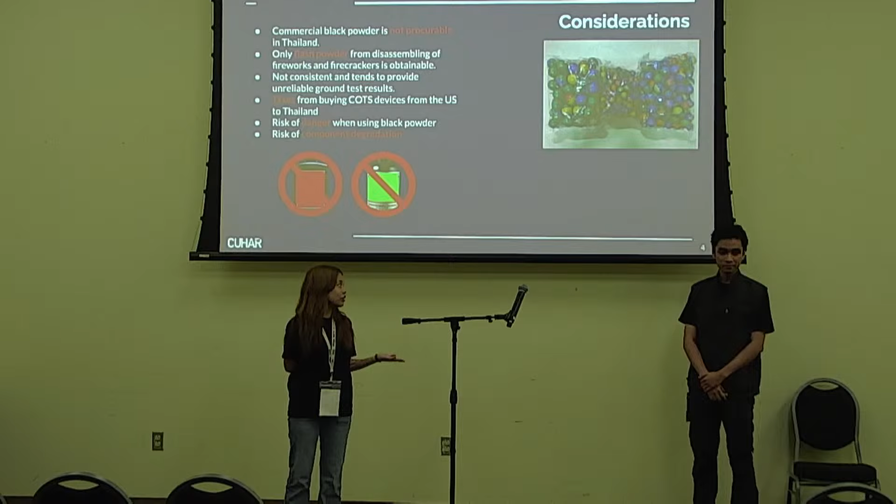So, okay, basically for recovery systems, the traditional way to do it is to use black powder. But in our case it's unique because we can't legally use black powder in our country. So the only workaround is to use flash powder from fireworks, which isn't very scalable and is quite dangerous. So we try to also move away from the risk of danger and the degradation of components. Another problem we might face is taxes from buying COTS devices from outer sources, for example from the US.

Okay, so this is our previous year's attempt. We had a pneumatic piston nose cone ejection system, and basically what we tried to attempt is to substantially reduce the use of black powder. But for this year, our goal is a little bit more ambitious. What we decided to do is to completely eliminate the use of black powder in our recovery system.

So just to add on, for our very first rocket for this competition, we used a pneumatic piston. This piston is kind of heavy, but it works by pushing the piston apart, like a mechanical separation. It was a start from our senior, but it was kind of heavy, so we tried to find another way which is more mass efficient.

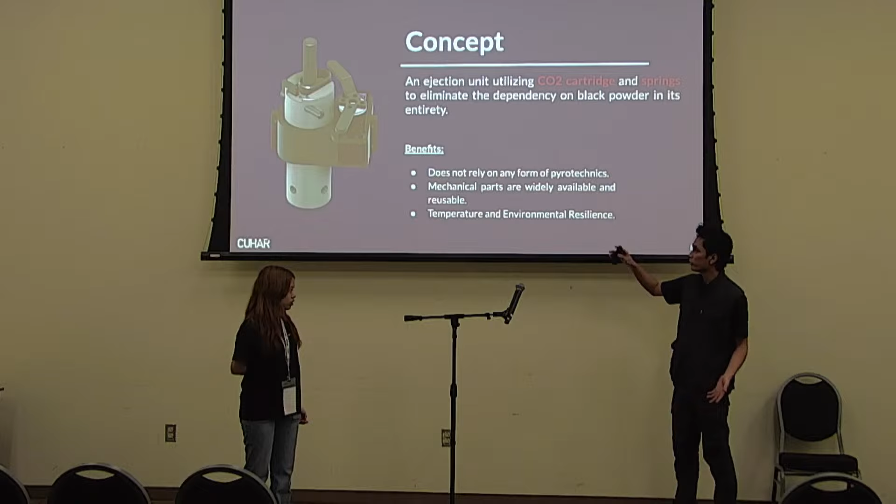And also in terms of temperature and environment, it was in-house manufactured, so it was not that sophisticated to manufacture in-house. We have a 3D printed case for the servo, which unlocks the key that is locking the compressed spring, which is essentially for puncturing the CO2 cartridge.

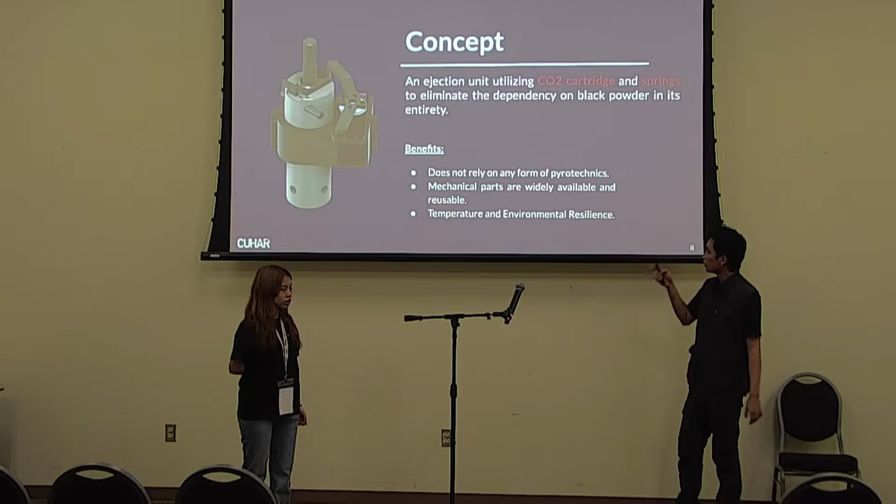Okay, so let's get into the spring integrated deployment. We're going to start with the components. So this is the center. We have a puncture pin, and with this puncture pin we have two main springs: a main spring and a rebound spring.

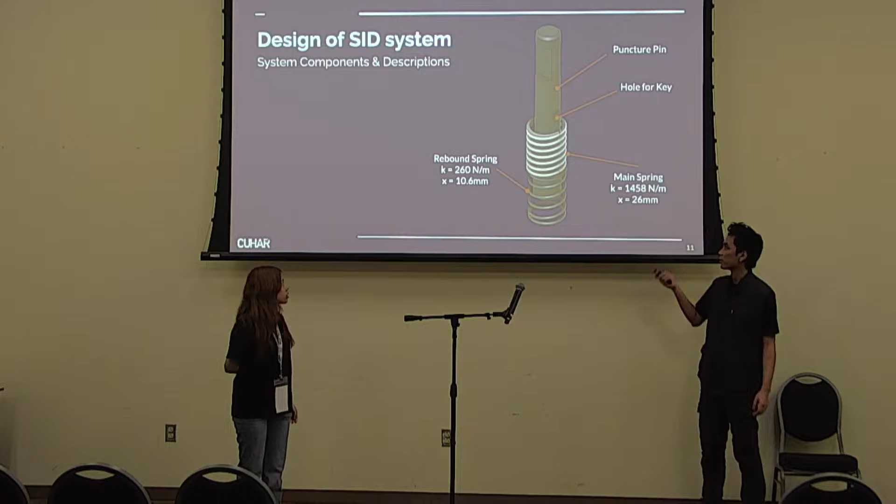The main spring is what drives the puncture pin to puncture the CO2 cartridge, and the rebound spring allows the puncture pin to rebound and clears the way for gas to escape. So we essentially do not want our pin to get stuck in the cartridge after puncturing, which is what the rebound spring is for. And this is just a sectional view of the component.

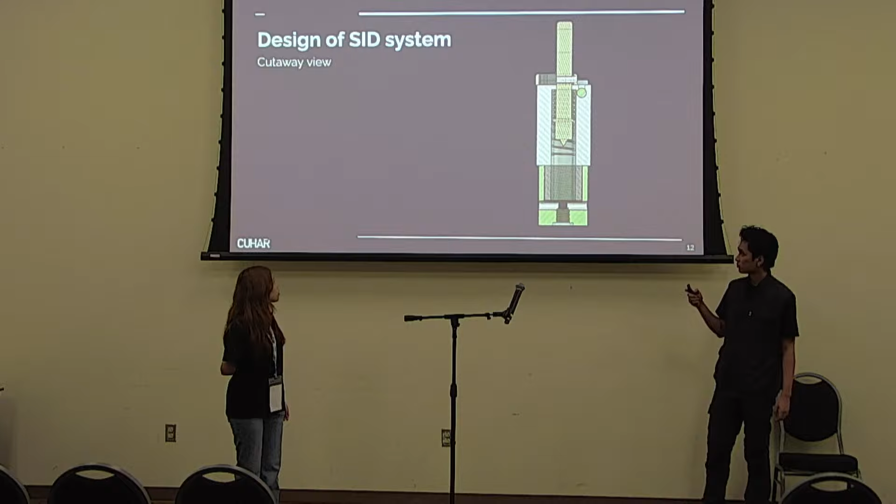Okay, so according to the DTEG, if you're using a spring component, we've got to have two safety locks. The safety key makes sure that the main key can't actually move or unlock itself for some reason, like vibration in the rocket. And the actual key slides out and the compressed spring decompresses, that's how it actuates. So this is the two key safety features that we thought of while designing this.

Okay, so these are the parts. All right, okay, yeah thanks. Okay, so is it working? Yeah, it does, okay.

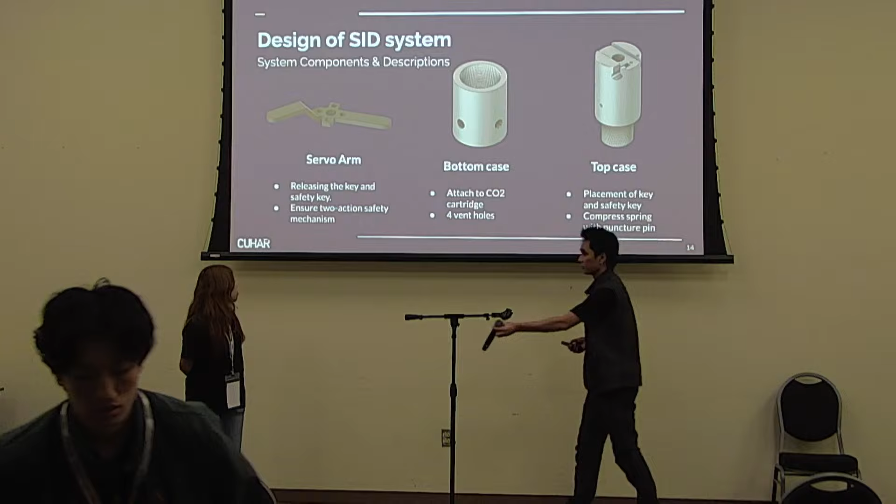So these are the parts of the spring integrated deployment component. We have a servo arm, which swings the safety pin out before actually actuating the component. There's a bottom case where the cartridge mounts to the component, and a top case where the servo, the pin, and the safety key are located.

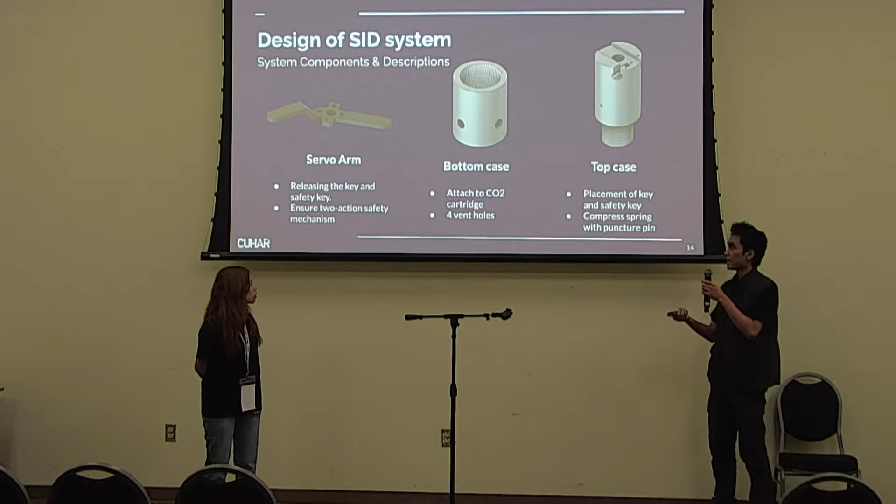And inside this top case, there will be a compressed spring. Okay, that's the servo motor we use, and that's the case.

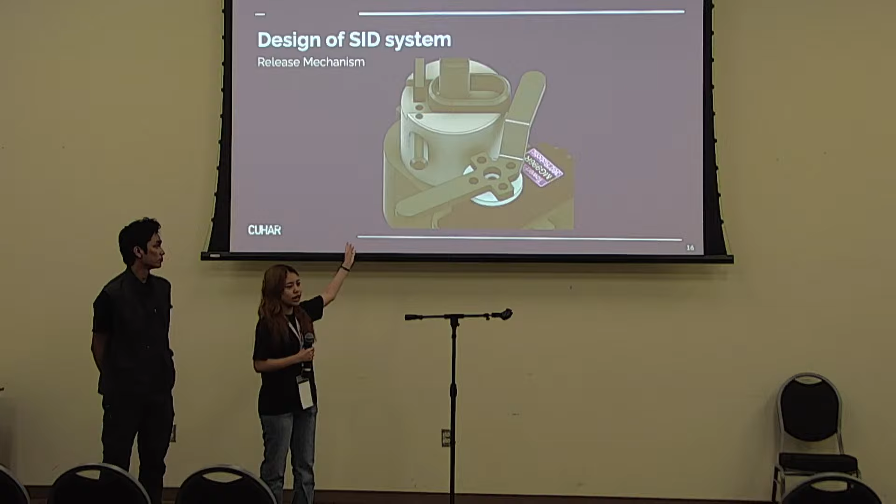Okay, this is the full assembly, and okay, we forgot to say what happens. Basically the servo arm first moves counterclockwise to release the secondary safety key. Then it will move clockwise to release the main key. And then the puncture pin will contract and puncture the CO2 cartridge.

Okay, so after designing and manufacturing it, we actually ran lots of ground tests, including inside our own rocket. So let's talk about the theory first.

There are two main theories that we use in calculating this component: moment and torque, because there's a servo that needs to sweep out the safety keys, and spring potential, which is calculating the spring needed to drive our puncture pin to strike and break the cartridge seal.

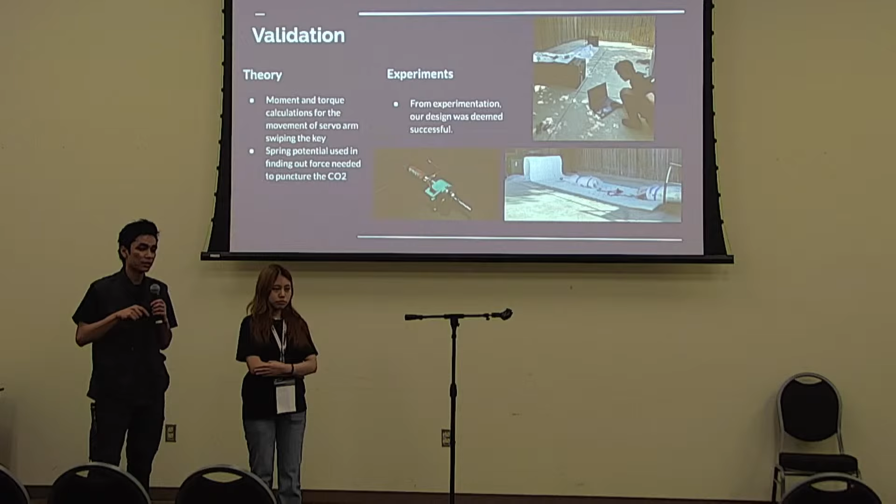And we experimented with it by itself first outside, then integrated it into our rocket to see if it actually works. And as you can see in the picture, our rocket separates.

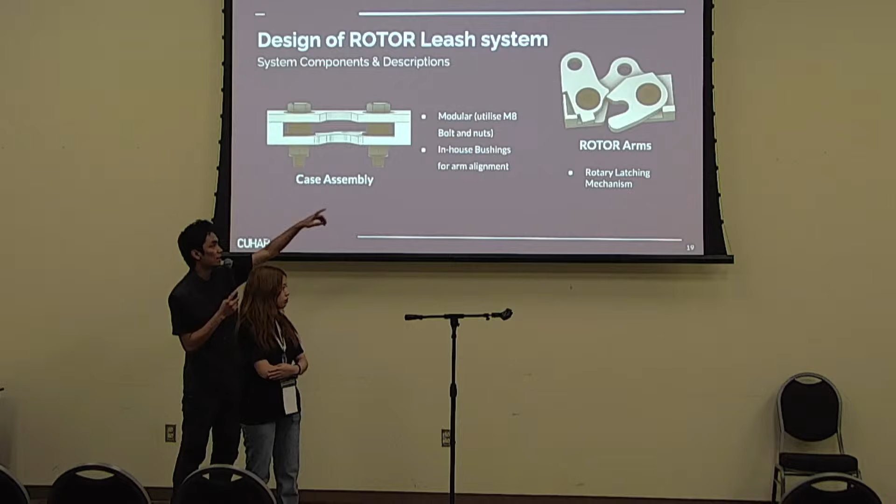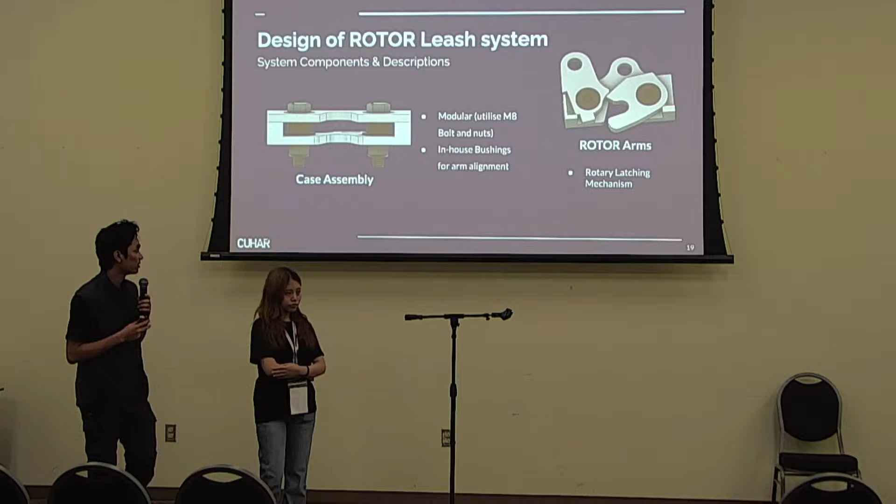Okay, right, so this is an overview of how it looks. This is the case without the arms, and as you can see in that picture, it shows how the arm is mounted. There'll be a case and bushing for the arm to pivot around, and this is actually modular because we can use fasteners that are widely available in local stores to assemble the case, and the bushing is made from nylon in house. So we make it ourselves, we don't have to spend lots of money ordering from outsourced manufacturers. Let's see the next slide.

Okay, so as I said, we have a case. There'll be a top case, bottom case, and a left arm, right arm, which are the main parts that unlock and lock our links, and there'll be bushings for aligning the arms together, and the whole case is compressed by fasteners which are available locally.

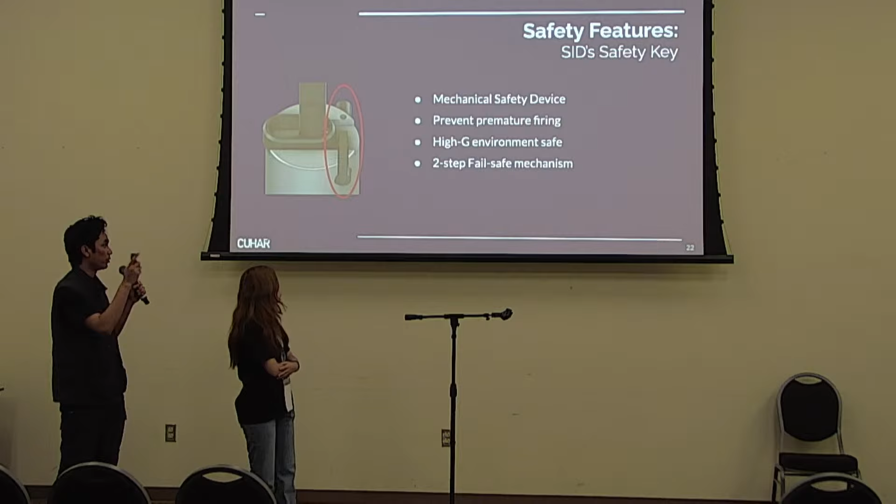Okay, so the safety features. We talked about the safety feature of the previous component, the ejection component. So we have a two-step fail-safe mechanism to prevent it from unlocking in a high G environment. And for the second safety feature of this component...

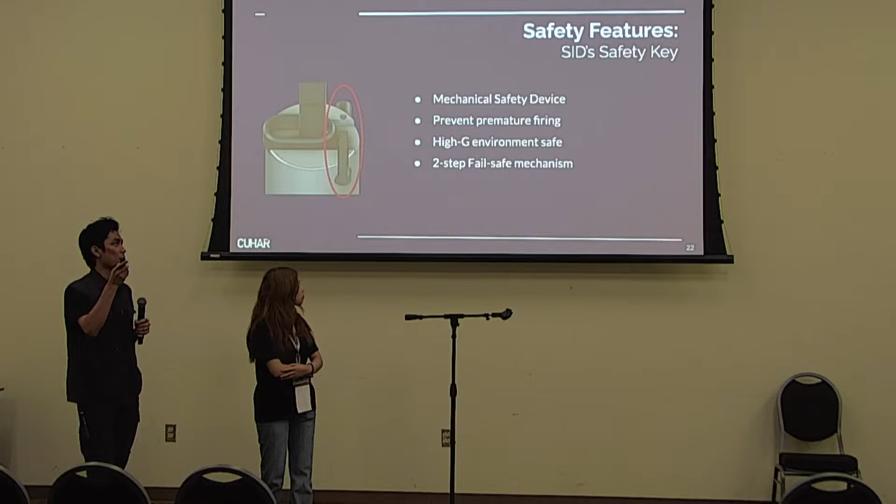Could you move? Okay, thank you. Okay, I'll tell you.

Okay, results and conclusion. We'll talk about the results and conclusion now. So the non-pyrotechnic recovery system is reliable from ground tests, from first calculating in theory and moving into ground tests, and we have validated our system several times, both in Thailand and after arriving here, we also validated it once again.

The system has the potential to be used in commercial rockets if we could commercialize it and find a way to produce the parts without complications. It would be great for Thailand rocket teams to use it since it does not complicate things, does not involve black powder, which makes teams have to find black powder, which is illegal and a gray area to use, and it does not degrade our component.

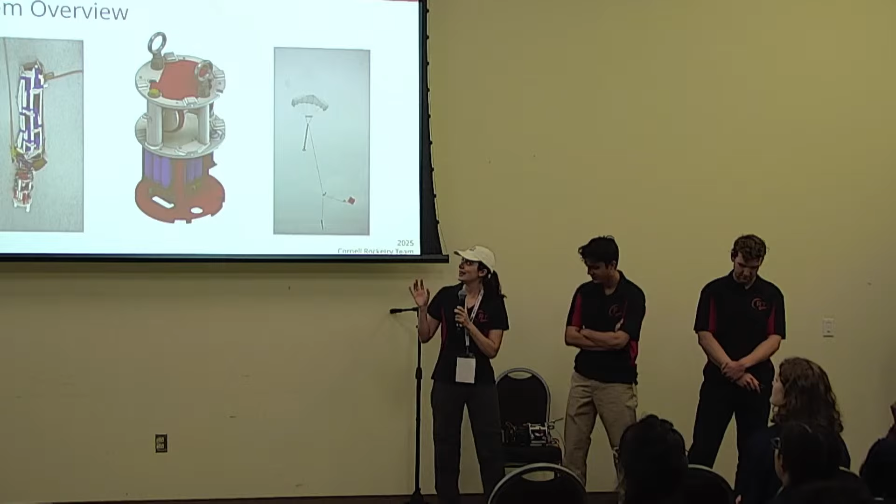So what we'll talk about today are three different systems. BLIMS is autonomous - it will steer our rocket's descent by pulling on the brake lines of a parachute to a specific GPS location that we input. The three parts we'll be talking about today are the mechanism, the controller, and the software that runs it.

To give you context about our recovery system this year, we're using a ram air parafoil. This is fundamentally different from the round canopies common in amateur rocketry. A round canopy is basically just a big piece of fabric inducing a ton of drag. A parafoil is different in that it's filled with cells that inflate with air and act as a wing. When you pull on the brake lines, they deform the ends of the parafoil, inducing asymmetric drag, which gives you a yawing moment.

That's what allows you to steer. So if you look at a photo of our test rocket underneath the parafoil, you can see it's actually gliding through the air - it's got some horizontal motion, and that's how we're able to steer, which gives you more control, but also gives you some more risk. It's definitely more complicated dynamics.

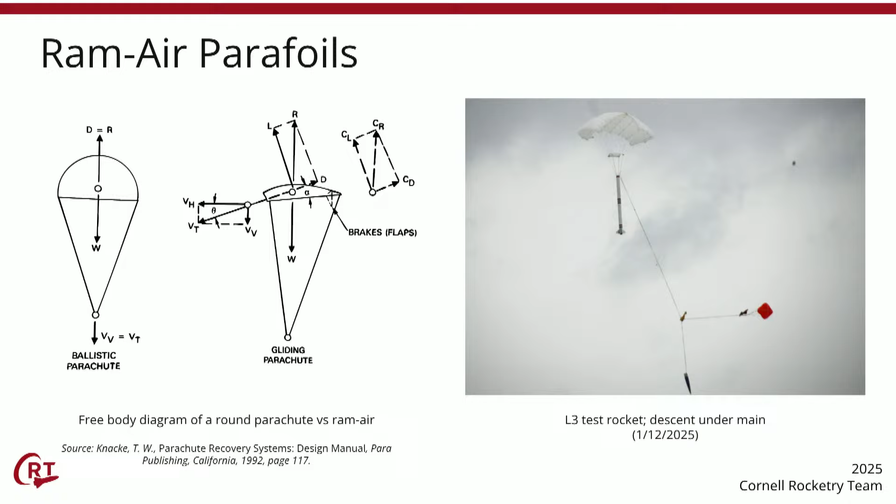Looking at our deployment sequence, it's also new for us this year. Usually we use 2 separations and deploy out of those, but this year we're just doing 1, using a COTS tether release device - the tender descender, which some of you might be familiar with. That definitely complicates our deployment and is just another thing we have to think about when starting the recovery sequence.

BLIMS is comprised of 2 bulkheads, and in between those bulkheads are a pair of spools. Those spools are mounted on a single shaft and powered by a single motor. By winding the brake lines of the parachute on each spool in opposite directions, as we spin the shaft in a single direction, we get counteracting up and down force, retraction and extension, which then leads to the left and right banks of the parachute.

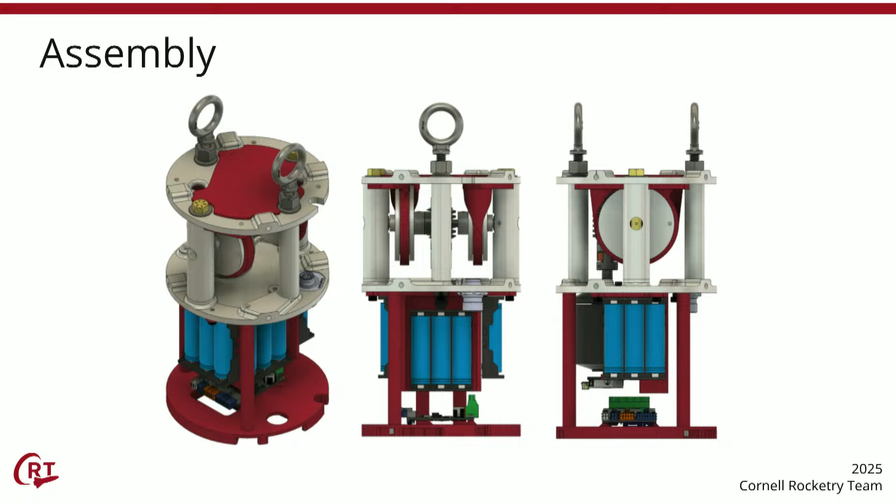Underneath the second bulkhead, we have the motor as well as all the batteries and the motor controller, and you can see a port down at the bottom there which allows us to connect this whole system to our central flight controller, which is running our own flight software - Trevor's program - and sends the signals.

You can see in this cross-section just a bit more detail of those 2 spools. We're using a worm gear and worm to transmit the motor torque up to the shaft. This prevents backdriving, so as the parachute initially deploys and there's a pretty significant force, this prevents that force from being transmitted back into the motor and causing us to lose position.

To select an appropriate motor, we wrote our own software simulation that takes into account actual motor torque curves, gear reduction of the worm and worm gear, the spool radius, and a few other factors. It generates a 3D grid of points, each point's color representing the validity of that combination. By visualizing these 3D spaces, we were able to identify not just the most appropriate motor given the torque and speed requirements, but also where in that operating envelope we want to have it.

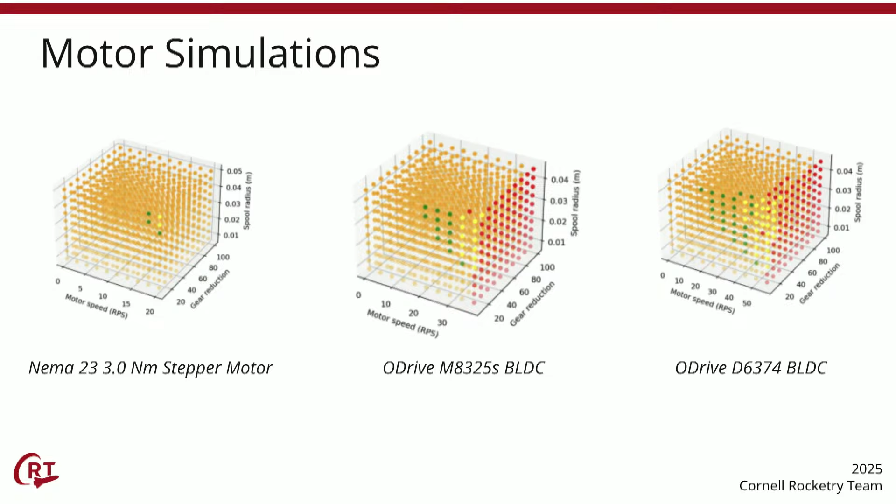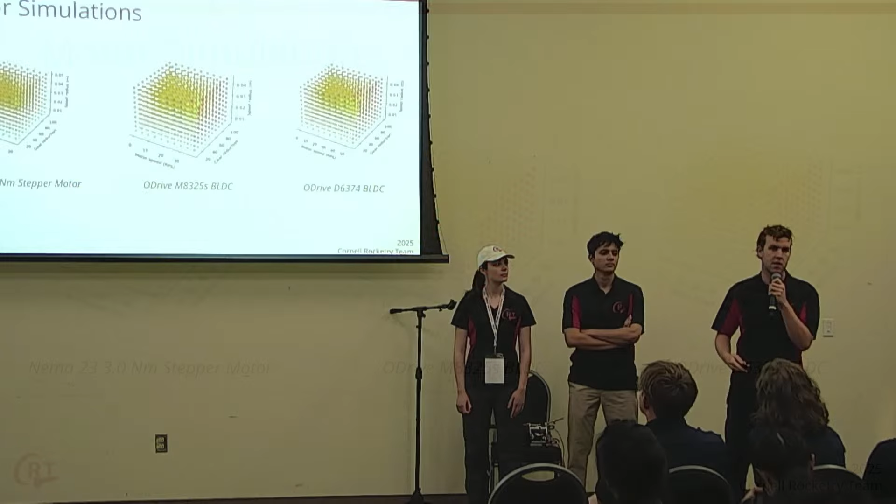We'll talk later in this presentation about the iterations we've gone through, but having an underpowered motor has been a huge issue for us. So actually writing this simulation and taking the time to think about it was pretty essential to having a high functioning mechanism.

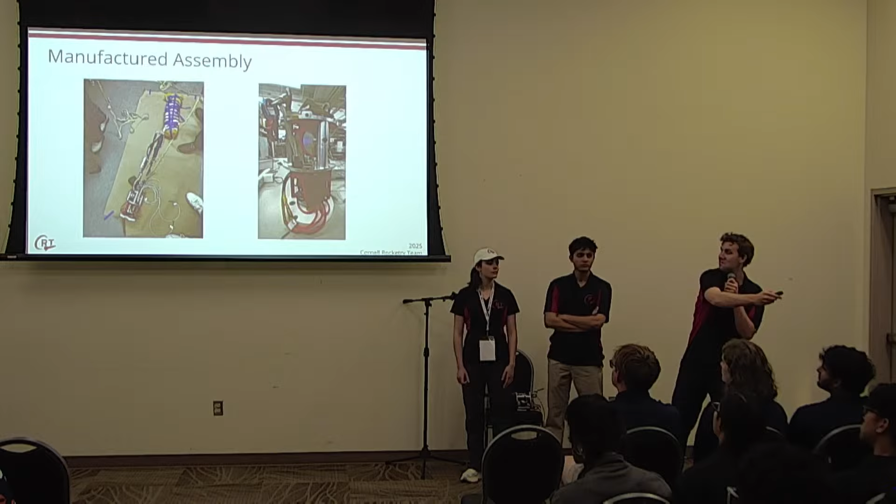Now I'm going to talk about the software architecture.

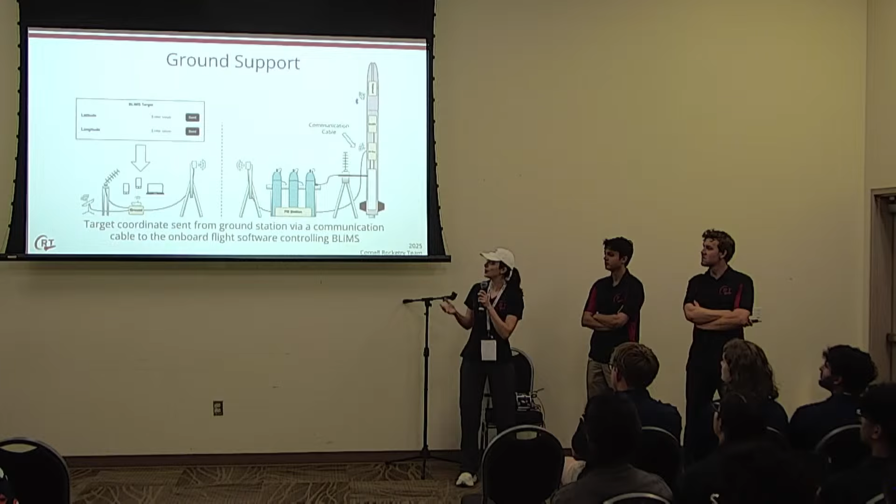This is an overview of our software system. We have a ground station that sends our intended latitude and longitude, which we input on a website. That is sent over a wireless bridge to our fill station, which then connects through a cable with our onboard flight computer - this is all an SRAD system. This allows us, on the pad right before launch, to send our intended latitude and longitude that we want to direct our rocket to.

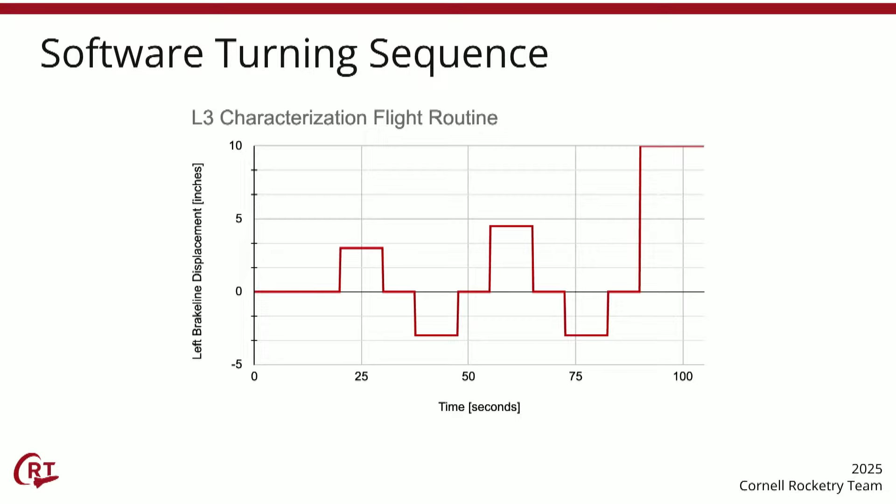Okay, so Thomas has now described a mechanism that is capable of performing the maneuvers that we want to execute underneath the parafoil. Gabby talked about how we can then talk to the rocket when it's on the pad and actually use the central flight computer to precisely control the motor when we're in flight. So now the question becomes, how do we actually steer to where we want to go?

So to answer that, I want to start with just some definitions. If we know our own GPS location and we set a predefined target, which we send when the rocket's on the pad, we can call our bearing the vector from us to the target - that's basically the way that we want to be traveling. Then the heading is the direction in which we are facing, and the track is the direction in which we're actually traveling - it's effectively your velocity vector. I'm making that distinction because they might not necessarily be the same thing.

For example, if you're in a heavy crosswind, then you might have a situation where you're facing one way but actually moving in a slightly different direction. So the control variable that we really care about is the track.

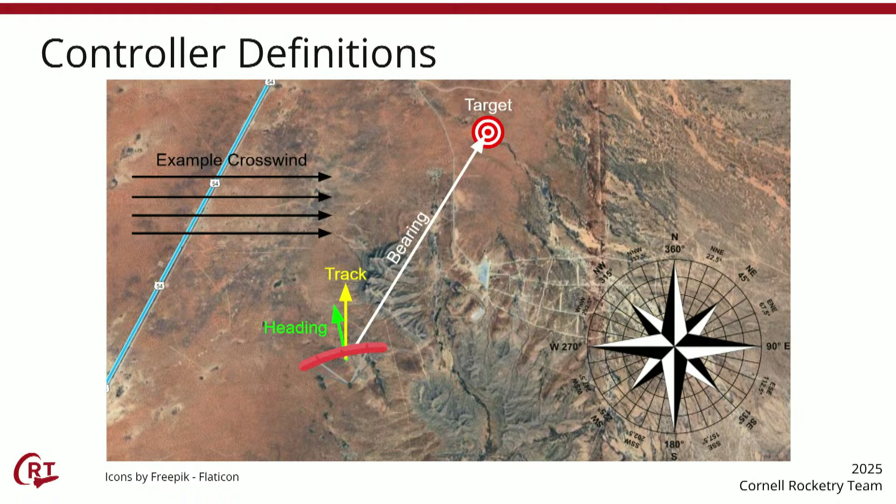So that discrepancy is fed into a PI controller, where your proportional control is kind of your immediate response to that - anytime you're not directly traveling in the direction of your target, you're going to have some P term show up there. And the integral term basically acts as your trim in the flight. So if you are being pushed by a crosswind that is holding you slightly off the vector you want to be on, that integral term will accumulate over time and will basically allow the system to correct for that error over time.

So I mentioned earlier that we've gone through a few evolutions of BLiMS. Here's a layout of all of our different generations going all the way back to 2019. What I want to emphasize here is that this system is kind of deceptively challenging. We actually started with a 2-motor design and ended up simplifying it to a single motor design.

So for a team that is considering building one of these, specifically on this 2-motor versus single motor point: we deemed, after actually jumping out of planes ourselves and talking with skydivers, that the added maneuverability of a second motor really isn't worth the additional technical complexity. We spent several years trying to develop this 2-motor design - packaging was really challenging. We ended up simplifying to a single motor design, and it's now working quite well. So this is just a point for anyone considering it: think about whether you really need the added flexibility of a second motor and whether it's worth that development cost.

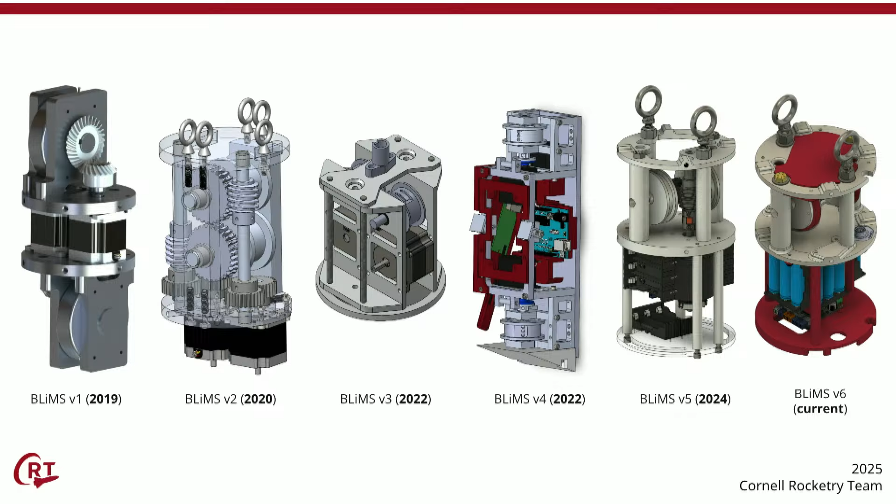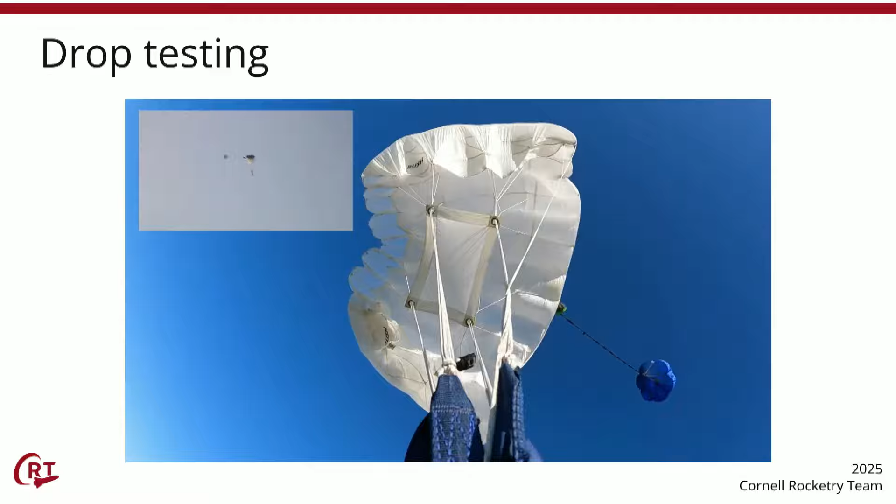So this is a video of us drop testing. Up until last spring, we had not tested our ram air parachute, and there were a lot of unknown factors, like could we deploy it correctly, could we package it correctly. We got to work with a local skydiving company that willingly dropped a 100-pound metal tube out of a plane with a parachute that may or may not deploy.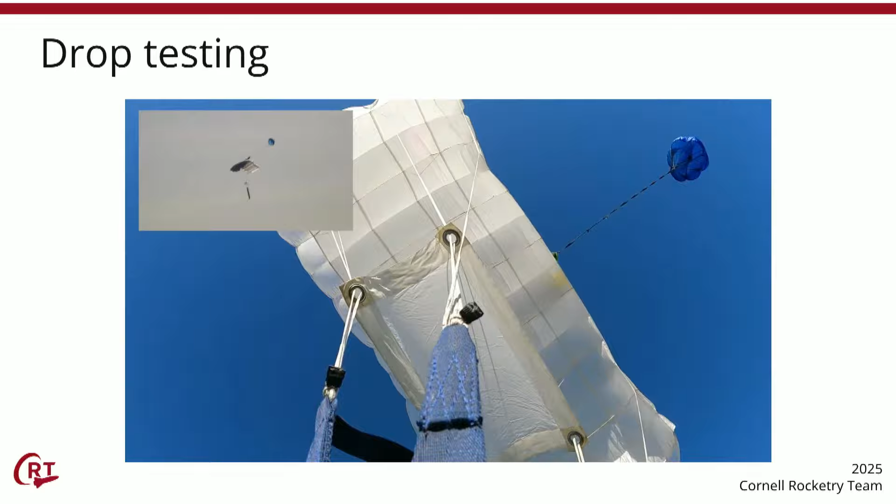As you can see, we successfully deployed, didn't hit any cows, and this taught us a lot. It showed that this parachute could be successful and that we could use it for our system. But what we also realized from this test is that we couldn't fully simulate a flight scenario, which prompted us to create our own testbed rocket this year, which we'll talk about later.

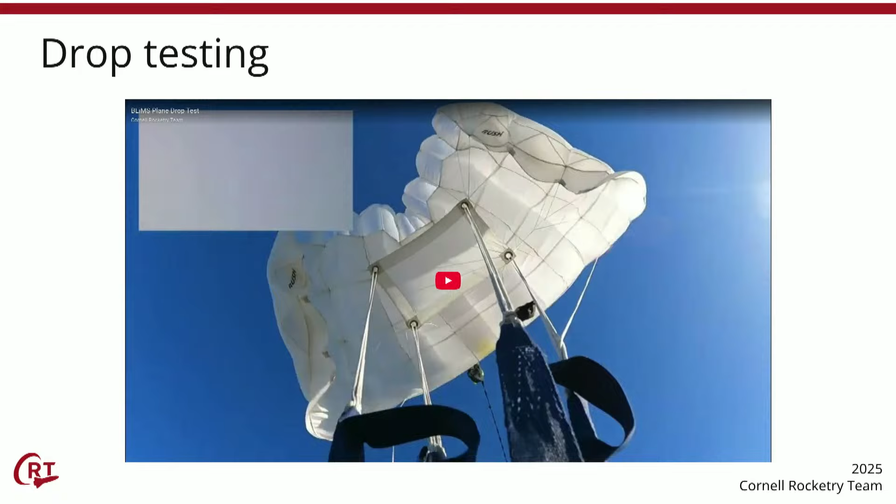One thing I want to highlight is those large opening forces. We have a nearly 150-pound rocket, and when that ram air parachute deploys, there's significant loading. In addition to the ANSYS static structural tests, we also built our own test rig. On the left there is a 2,500-pound winch, which we can use to apply forces for an extended period onto specific components of the BLIMS assembly as well as the entire assembly itself. This really was about making sure the components could withstand the forces, but also that the shaft wouldn't deform under those loads and cause binding later on in operation.

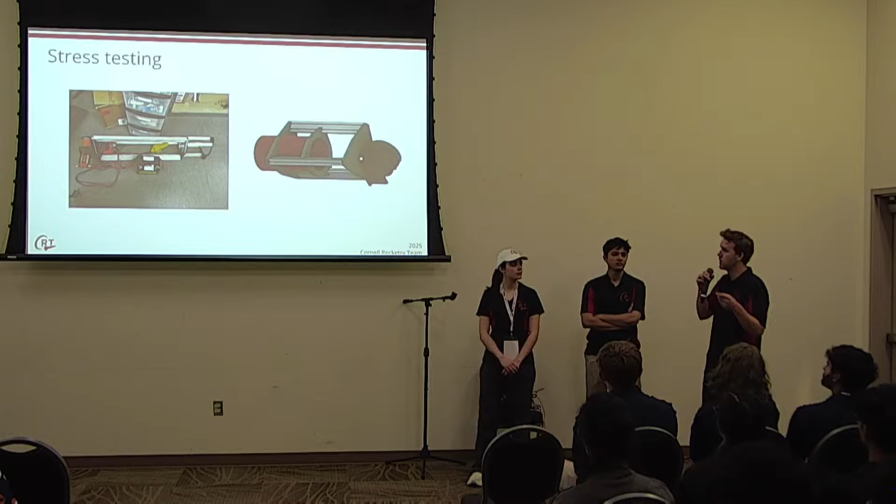This was hugely valuable because ANSYS and FEA in general can give you really precise results, but validation is equally as important. This was an important step in making sure that our simulation results actually matched with reality.

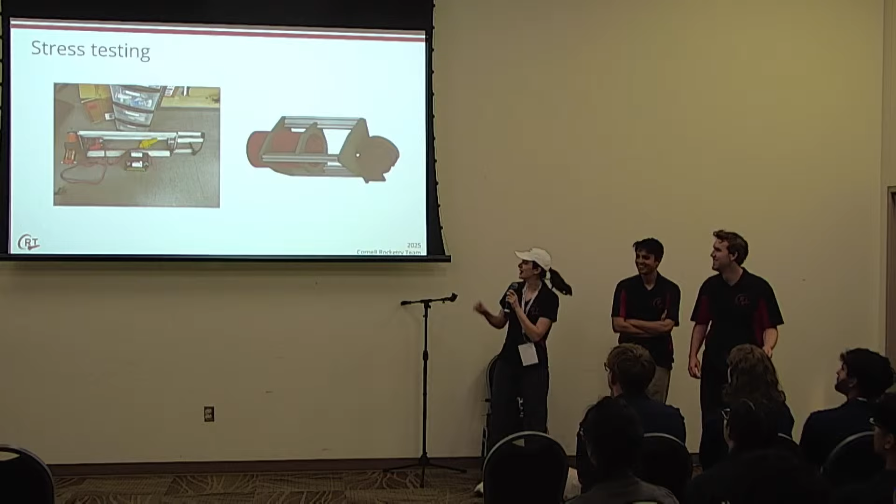Like Gabby mentioned earlier, we decided pretty early on that it was going to be really important to our design process to have a way to actually get this thing in flight. The way we did that was through a rocket independent of our competition rocket. So we brought up an L3 test platform and launched it 4 times.

You can see we definitely had a bunch of failures. That's the first time we tried to launch it - it blew up on the pad. On the right there, you can see the rocket sitting in the snow. That is indeed the main parachute still inside the section. So we had a lot of problems with things surrounding the system, not just the system itself.

I talked about how we had that new deployment sequence for us - we definitely had some hiccups there that we had to deal with. This was just a really great way to get through that. But we also got a ton of great data out of this.

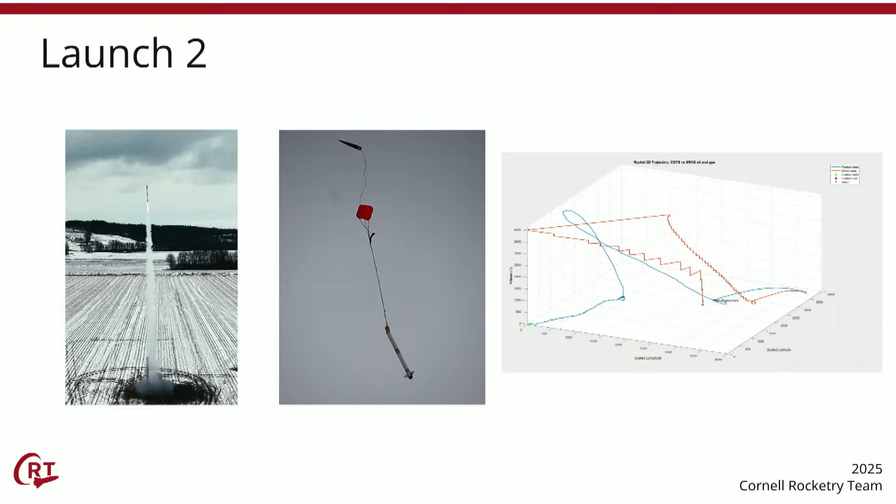Our second launch was the first one where we had some real success. This was the first time where we had our SRAD GPS driver working, so that allows us to get real-time GPS data that can actually be fed into the central flight computer. This was also the first time we had our parafoil deploy with this rocket.

The next launch where we had a lot of success was the fourth one. Here's the GPS trajectory from the launch. At 1,500 feet, our main parachute opens, and all of those little zigzags is BLIMS turning the rocket.

That characterization sequence that Gabby was talking about earlier, that's what we're doing here - we're trying to see how consistent we are when we pull this amount, how much the rocket actually turns. This gave us a bunch of really good information about that, and it's just super cool to see that we could actually turn - that was really great.

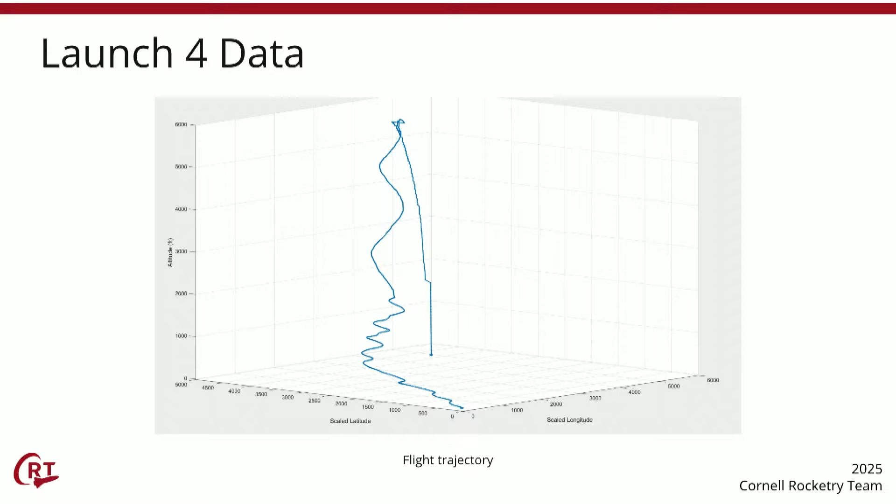So here's the top-down view of that trajectory. You can see after each maneuver is called out there, we have a clear turn.

Something really important to note is how susceptible we are to wind. All those little points mark every time our track vector is more than 90 degrees away from the wind direction. At that point, we effectively stall and have no more forward motion. That's a huge limitation on our system. If the wind is strong enough, we just can't travel upwind.

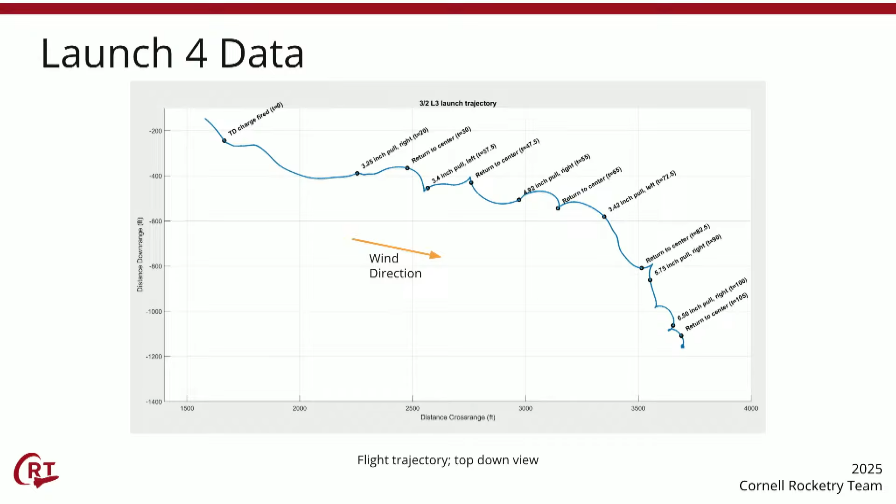So the way around that for now, from a mission planning perspective, is trying to choose points that are downwind. Luckily we can change our target right before we launch, so we can get an idea of what the wind looks like and choose a point downwind. Additionally, the controller is tuned pretty conservatively. It is a skydiving parachute, so you can do sporty, aggressive maneuvers, but the goal here is to have more conservative, slow movements to get us facing the way we want.

Another tool we use to understand the parafoil—the dynamics are really complicated—so we made a simplified simulation in MATLAB. This just considers a 2D plane and some torques: the torque applied by asymmetrical drag from pulling on the brake lines, a small drag torque resisting our motion, and a wind restorative torque term representing the fact that the parafoil wants to orient towards the downwind vector. This was useful to understand what a step response would look like.

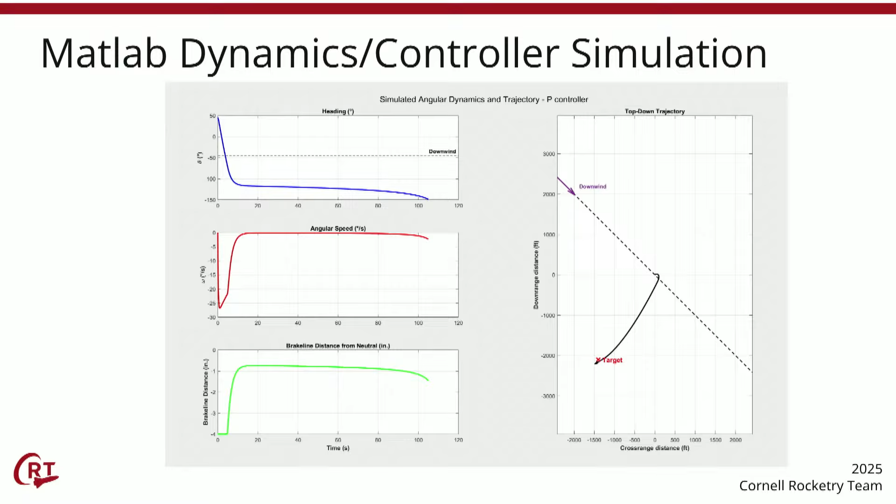Here's an output of where we're running a P controller. You can see the undershoot characteristic of a P controller, which causes increased input over time as you get closer to the target. This was built based on our empirical data to match that as closely as possible, and it gave us a starting point when tuning our gains, while also letting us understand how an undershoot would affect us and what we need to consider when choosing a target.

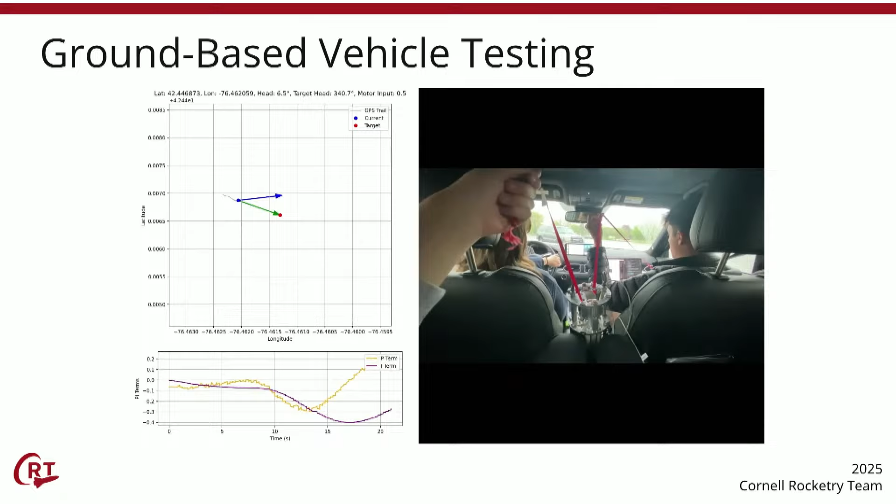The last step of testing the controller was we put it in a car and drove it around to see what it did. On the left is a visualization of the data coming out of the controller in real time—the blue arrow is our current heading. As we steer over the target bearing, the system responds: right now we're too far to the right, so the left brake line pulls in, inducing a left turn back towards the center. Watching the P and I terms, the P term responds immediately to the error, while the I term slowly integrates that error over time. This was a good way to validate on the ground the ability of our controller and the logic in general.

At this point, we have a mechanism that's been tested in flight and we know is robust to those high opening forces and able to execute calibration turns. We have a controller able to steer us in that direction, which has been tested on the ground. Tomorrow, we're excited to launch this system with both of those married together and actually guide to a GPS waypoint for the first time—and hopefully not end up in a tree.

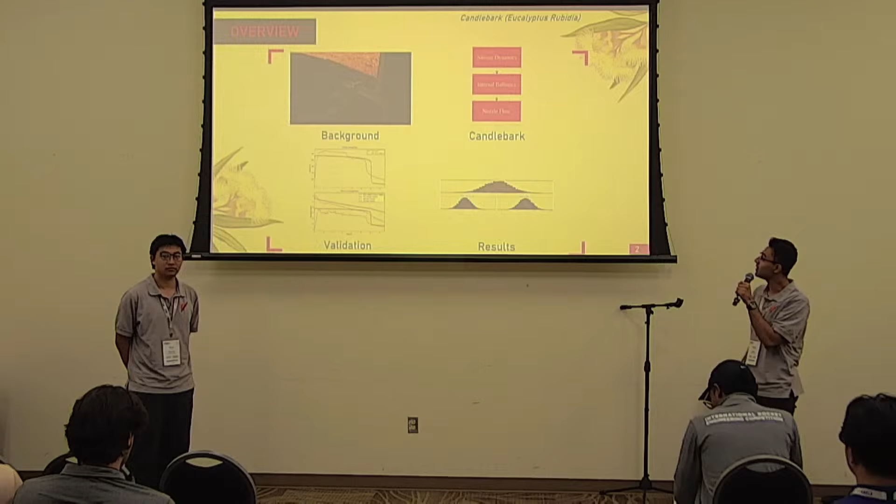Today we'll take you through a background into hybrid engines and the team's history with hybrid propulsion. We'll then take you through the internal models that make up Candlebark, and through the rigorous testing and validation we've conducted via internal tests, unit tests, external validation, and finally a flight test to validate the performance of our software. Finally, we'll show how we applied our software to our IREC 2025 entry into the 10,000-foot SRAD hybrid liquid category, Project Podium.

A little bit about hybrids: unlike solid engines, which fuse their oxidizer and propellant into one singular grain, hybrids have these separated. Typically this looks like a liquid or gaseous oxidizer and a solid fuel. This results in a much more distinct thrust curve compared to solid engines with similar impulse, where the majority of thrust is produced during the liquid phase, and a sudden drop-off is seen during the gaseous phase. This presents a new set of challenges when designing a launch vehicle around a hybrid engine.

A quick bit about the team's history with hybrid engines: our journey began in 2021 with Project Waratah, our first subscale hybrid engine, which laid the foundation for our understanding of hybrid propulsion theory and engine design. This carried on to Project Wattle, an N-class hybrid motor, which also saw the development of our permanent testing facility, allowing us to conduct hot fires of all three hybrid engines. Knowledge from these two research projects then led to the design and testing of the Podium engine, our first flight-scale hybrid engine, which, unlike our previous engines, had much more finely tuned performance parameters that were increasingly modular due to the engine's concurrent development alongside the launch vehicle.

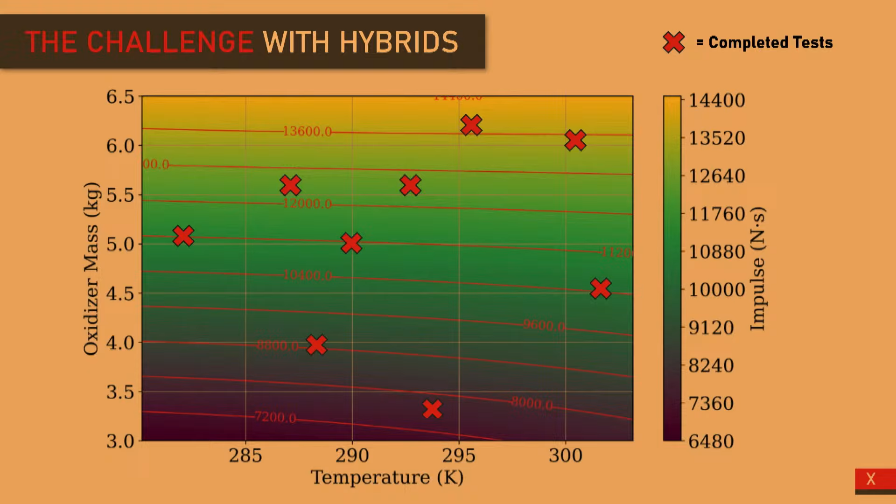The primary challenge we face, and hybrids in general face, especially when transitioning from a research project to one considered for a launch vehicle, is the high variation of hybrid engine performance based on ambient temperature and overall environment, where small changes in temperature result in fairly large deviations in the oxidizer mass that can be loaded during filling of the engine, which significantly impacts impulse and therefore the apogee of the launch vehicle. The USYD Rocketry Team has conducted a series of fill tests throughout our testing campaign and seen small deviations in temperature result in fairly large deviations in mass.

Current solutions or simulators available to solve this problem and better model hybrid engines range from student research and designed softwares to commercial softwares. While commercial softwares may offer increased advanced performance and model complexity, the paywall often associated with these effectively makes them unviable for a student team such as ours. Current student research and design softwares such as HRAP, OpenThrustPy, Novice, and HybridPy employ fairly simplistic models for their nitrous modeling and internal ballistics, which could be improved upon.

However, the team sought to utilize a hybrid simulation software and package it further down the line with trajectory solvers, allowing us to create an end-to-end software pipeline to accurately and effectively simulate a hybrid launch vehicle from the conception of its engine all the way to its launch. We found that no commercial or SRAD options met our requirements, and hence we moved to creating our own simulation software.

Candlebark, named after a native Australian flora, hence the lovely flowers you guys can see, is based off 4 major pillars.

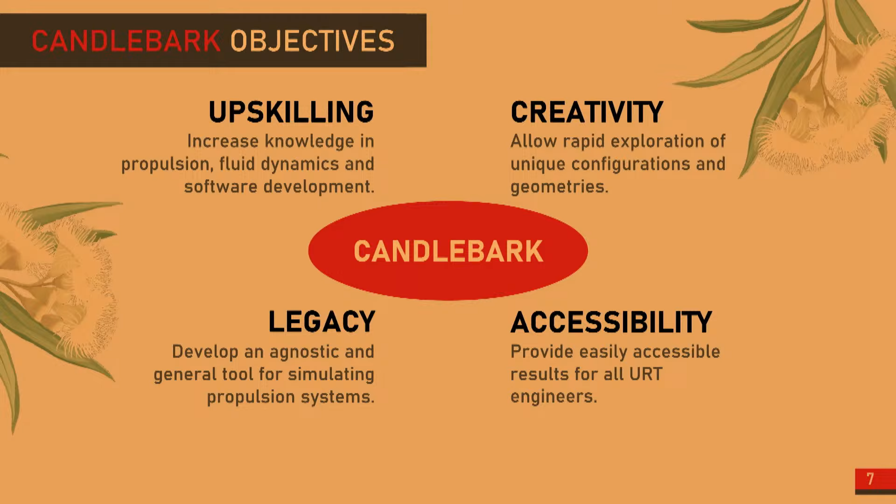Firstly, upskilling, ensuring that our software is able to condense and capture as well as teach our undergrad engineers to do with combustion and fluid dynamics. The second is creativity, a core tenet towards Candlebark and our hybrid simulation software was to ensure that the complexity of our hybrid engine designs was limited by the capability of our engineering capabilities rather than the quality of our software.

Next, accessibility. As a student team, we wanted to ensure that undergrads of any level could understand, utilize, and further progress this software, and hence it was written in Python, which is taught as a first-year course at the University of Sydney.

And finally, legacy. We wanted to create Candlebark not purely as a software that could be used for the current project where it was modeled, but more so a tool that was decoupled from the current project and could be continually advanced and progressed for more complicated and sophisticated hybrid designs as the team continued its journey with hybrids. And now I'll pass it on to Coy to take a deep dive into the methodology behind Candlebark and the internal models that allow it to have greater performance compared to current SRAD options.

So everybody, my name is Coy. Candlebark is divided into 3 core control volumes that encapsulate all aspects of hybrid rocket engines.

We have the first control volume, which is nitrous dynamics, responsible for simulation and modeling of how the tank drains and how nitrous evacuates the tank, and how that affects the temperature, pressure, and molar composition of the tank.

Secondly, we have the internal ballistics module, which is responsible for the regression rate calculations, gas dynamics, and how our geometry evolves as a function of time. Finally, we have our nozzle flow module that is responsible for calculating the thrust force given the exhaust gas dynamics.

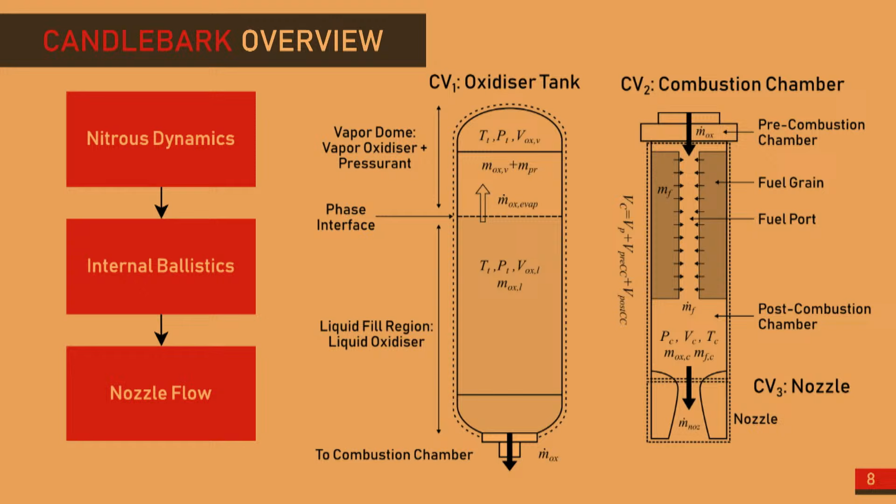I'll be focusing on the novelties of Candlebark, which is focused on nitrous dynamics and internal ballistics. The nitrous dynamics can be broken into 2 core main logics, which is the tank drain and the injector model.

For Candlebark, we employ a non-ideal, non-adiabatic model, meaning we account for the heat transfer processes within the tank. There are a couple different heat transfers occurring: firstly, temperature differences in the phase of the tank, the liquid and vapor interacting with each other, as well as liquid to the tank wall and the tank wall to the ambient, as well as the liquid evacuating the tank.

Secondly, for non-ideal effects, we employ a non-ideal equation of state, meaning we are able to account for molecular interactions within our gaseous phase, which has given the team much better simulation modeling capabilities of pressurants in the system, giving us the flexibility to design systems that can go into that sort of regime of pressures.

Next, for injector modeling, simulation and modeling of injector flow is perhaps the most crucial component in quantifying hybrid rocket engine performance. This is extremely difficult due to the high pressure drop experienced by hybrid rocket engines, hence you often have phenomena such as two-phase flow and choked flow.

Now, there is no encapsulating model that captures good nitrous flow across all flow regimes, and hence Candlebark is dependent on casework. For example, if all liquid has evacuated the run tank, the single-phase incompressible model is defaulted to, because the fluid is inherently singular phase, and the pressure convergence is satisfied enough such that single-phase incompressible becomes valid.

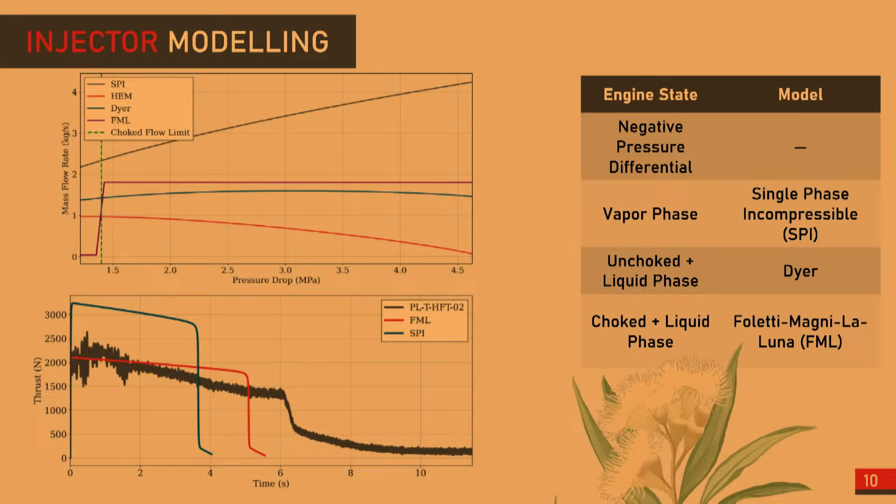So then Candlebark, for every single time step in a simulation domain, depending on the pressure drops, fluid dynamics, and characteristics, is able to dynamically choose which model it solves for nitrous flow.

So now finally, we have the last cool feature of Candlebark, which is its ability to extend past circular port simulation and modeling. Candlebark has a couple of port geometries built in, however, the user can import a CSV document containing the geometry they want as X and Y values. This has allowed unprecedented creative freedom in terms of hybrid rocket engines, and it has allowed the UC Rocketry team to explore many unique and different port geometries in their design cycle.

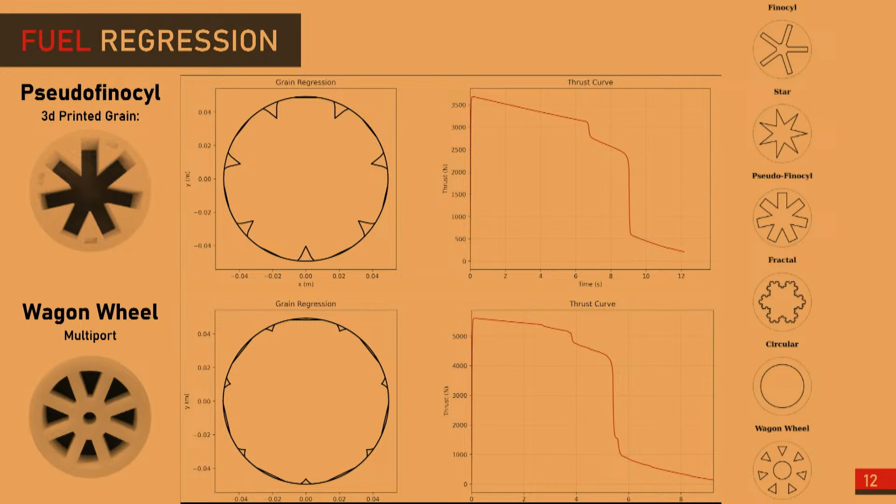So now I'll give the mic back to Sahaj, and he will discuss how we validated all of our software.

Now that we've gone through the overall methodology behind Candlebark, we also engaged in a rigorous testing campaign to ensure that our novelties allowed Candlebark to have boosted performance compared to other viable public options. Firstly, we engaged in unit validation, for example with our nitrous modeling, which fused our tank draining and composite injector modeling through multiple cold flow tests, and we found good agreement between experimental and theoretical data. We also utilized cold flow tests to derive our injector discharge coefficients to further boost the accuracy of our model.

We then engaged in a rigorous testing campaign throughout 2024, especially with our Podium engine, where we tested a vast array of very different engine configurations, varying our injector area, our fuel grains, as well as our nozzle throat diameters. Despite these very large deviations in our engine configuration, we consistently saw with our latest model of Candlebark very good agreement with experimental data.

Comparing this with University of Tennessee's commonly used hybrid simulation software, HRAP, we saw consistently much better agreement with Candlebark as compared to HRAP with our experimental data. It should also be noted that specifically for hot fires 10 and 12, more complicated engine configurations were hot fired, namely reduced infill density of an ABS fuel grain, and secondly with hot fire 12, a much more pseudofinocyl fuel grain, which HRAP could not support.

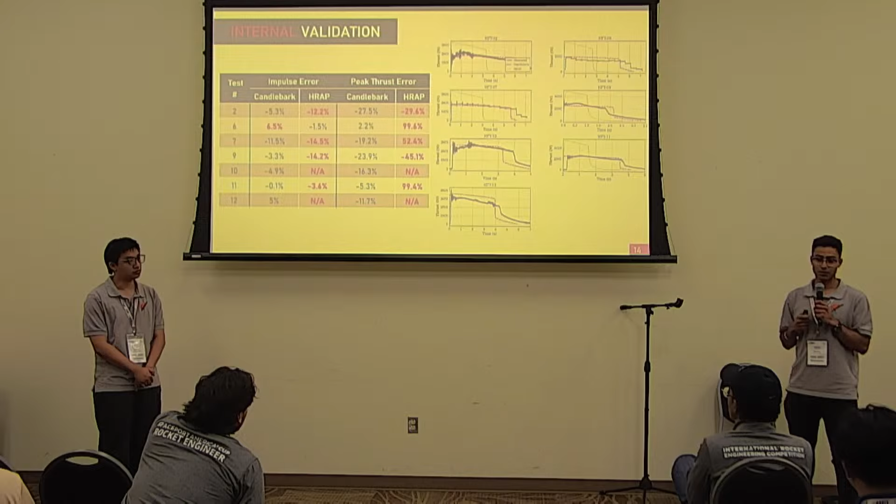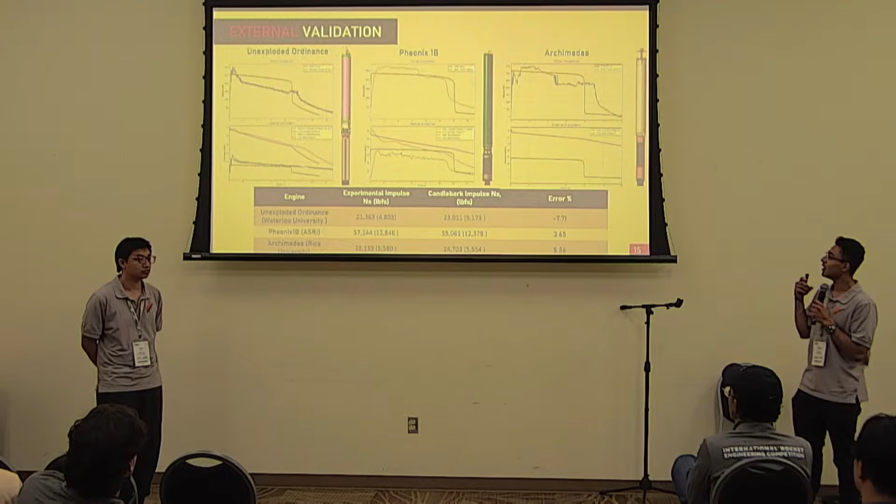To ensure once more that we created a tool decoupled from the engines it was modeling and developed and validated against, we also engaged in a rigorous external validation campaign, using publicly available data from hybrid rocket engines made by student teams and research groups. We ended up seeing a very similar amount of error and agreement with our overall impulse. This included the unexploded ordnance by Waterloo, Phoenix 1B by ASRI, and Archimedes by Rice University.

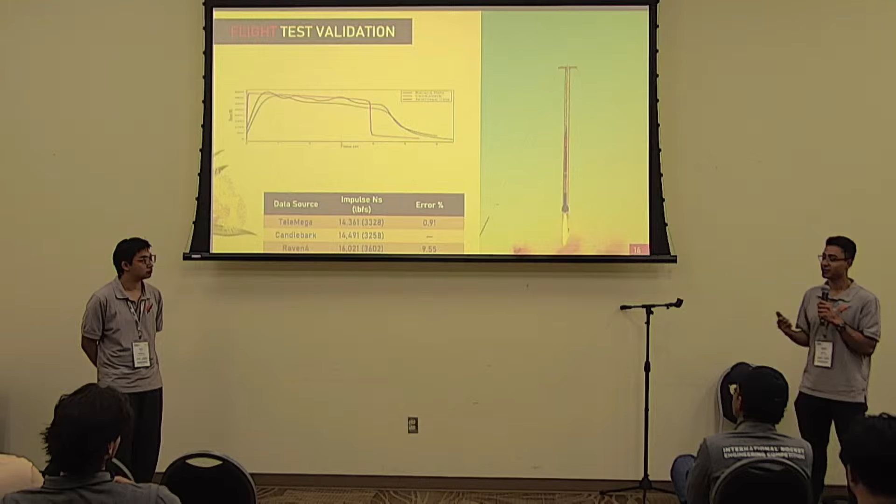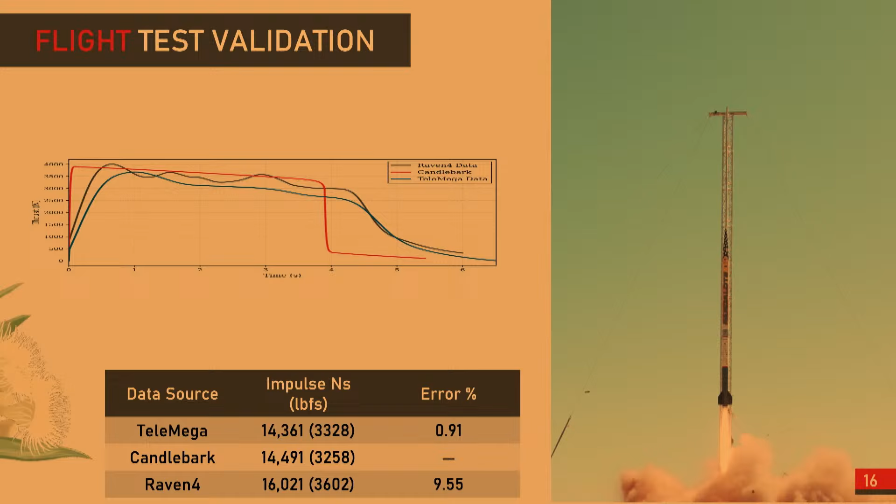Finally, to translate this into a launch vehicle, we also compared Candlebark's prediction of Podium's launch with the experimental data of a thrust curve derived from accelerometer data from our flight computers. We found with our Telemega, our primary flight computer, a less than 1% error in the thrust curve and overall impulse, and with Raven, we saw about a 10% error.

I'll now pass it back to Koi to discuss how this tested tool was utilized to solve the main design engineering problem of Podium.

Since Candlebark and Podium were developed concurrently with each other, during the early stages of the design process, Candlebark was not available as a tool to be used. So the team reverted back to using HRAP to size all their propulsion systems. One of the main criteria for sizing is to have an adequate pressure drop in order to have good combustion stability, which is something the team has experienced issues with in the past.

Since HRAP uses the single-phase incompressible model, as previously mentioned, for large pressure drop regimes it tends to overpredict mass flow rate, and since we sized everything based off of that, it drastically undersized major components of our propulsion system. Hence Podium, for the majority of 2024, did not reach its target apogee and other target performances. So then Candlebark was implemented to resize the propulsion system, given the constraints that the casing of the engine and the tank had already been manufactured previously.

So the sizing scheme of Podium is automated, given that the user inputs the constraints of the problem. In our case, we have constraints on the maximum length of the fuel grain, the diameter of the fuel grain, the maximum injection area, and its maximum chamber pressure.

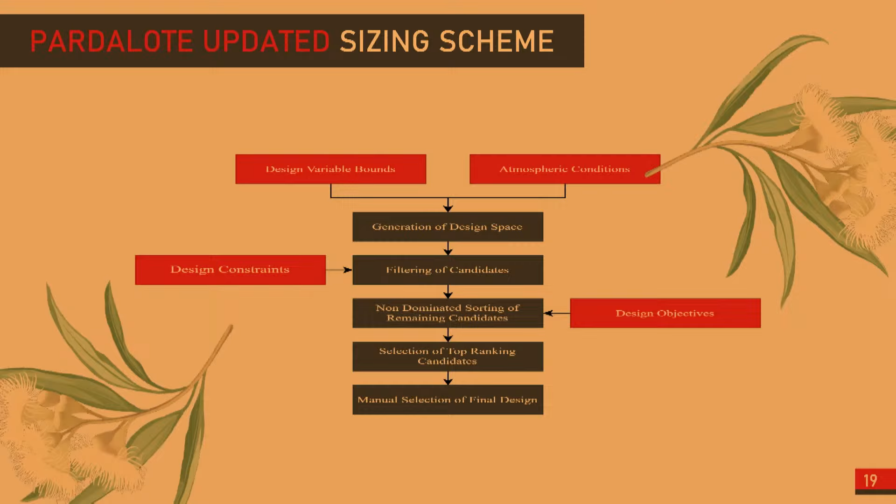We also have target objectives that we can put in, such as the target apogee of the system and trying to reach closer to stoichiometric combustion of ABS and nitrous oxide, which is 5.5, something we've also been struggling with. Candlebark, based off of that, generates a design space, and since it's a multi-process operation, it's able to complete 10,000 different design configurations within the hour, allowing the team unprecedented flexibility and creative freedom to pick and choose the engine design configuration that works best for them and their engineering limitations.

And finally, we were able to figure out the right chamber pressure for us to operate at using Candlebark, such that we maximize performance while still retaining the adequate amount of pressure drop for negating combustion instability.

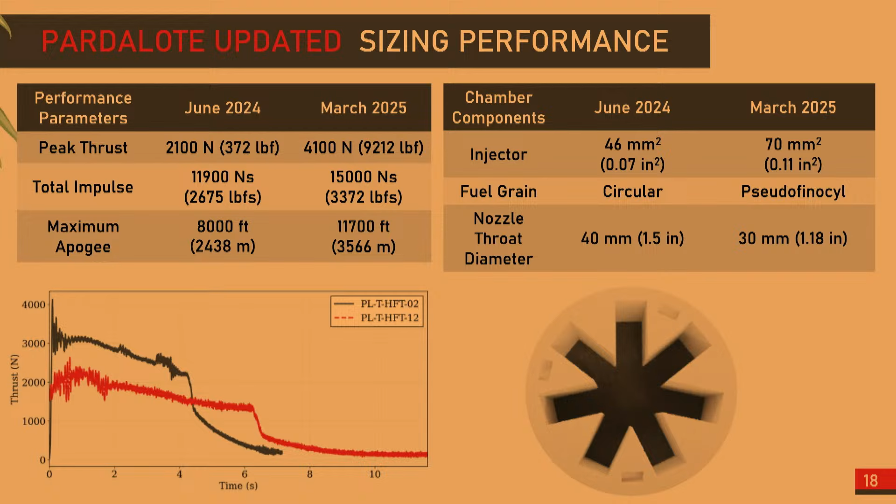Given that we have resized our engine, we then have a nominal flight path for Candlebark. From a nominal flight path, when we integrate Candlebark with our 6 degrees of freedom trajectory simulator, IREC, that gives us a full end-to-end simulation of hybrid engines and hybrid rockets in general.

From this, we're able to conduct a Monte Carlo analysis of our nominal flight path. Apart from traditional inputs into Monte Carlos for sounding rockets, such as dry mass, center of gravity, and launch rail angle, we were also able to incorporate hybrid-specific aspects into this Monte Carlo simulation, such as fuel grain density, the ullage factor, meaning how much we filled the tank to, and fluid temperature, all of which, as previously mentioned, are extremely sensitive variables that have a drastic impact on propulsion performance.

Having the capability to include these factors into our simulation allows us to fully characterize hybrid rocket engines in general.

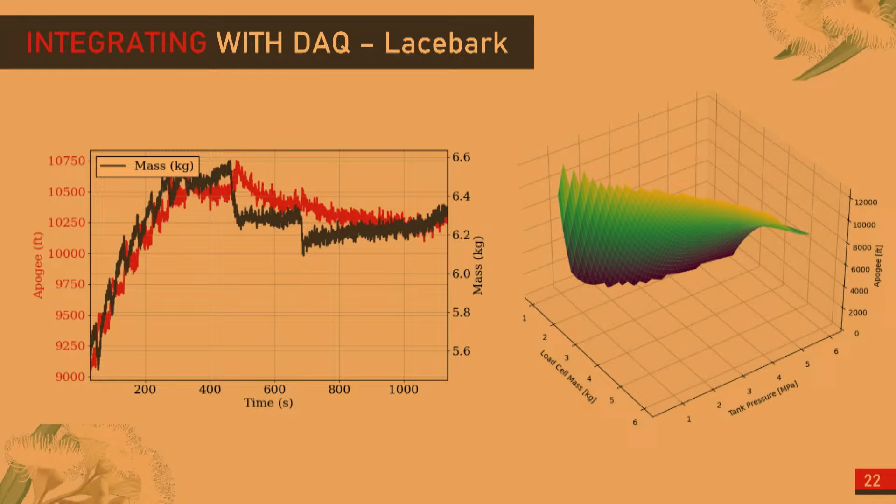And finally, we have integration with our data acquisition and control software. So Candlebark, in tandem with our trajectory simulator IREC, is used to generate a lookup table of mass and pressure, and from that, it predicts an apogee.

This script is then loaded into our ground control software, and then taking in a pressure transducer reading and a load cell reading, we're able to determine the apogee of the rocket during the propellant filling sequence. From this, we're able to dynamically target how much oxidizer mass we put into our rocket engine, such that we can accurately target 10,000 feet on the day, regardless of ambient conditions.

This has also improved the rocket as a whole, as we're able to bypass complexities such as active control mechanisms.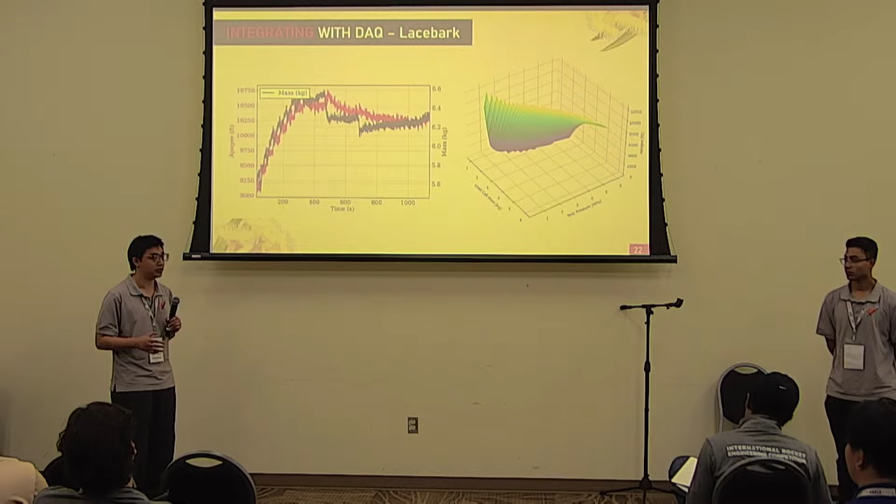So to run through the presentation to conclude: firstly, we introduced hybrid rocket engines, UC Rocketry team's involvement in hybrid rocket engines as a whole, the challenges, and how other teams have endeavored to solve them. We then presented our own personal solution, Candlebark, how it works and its novel features.

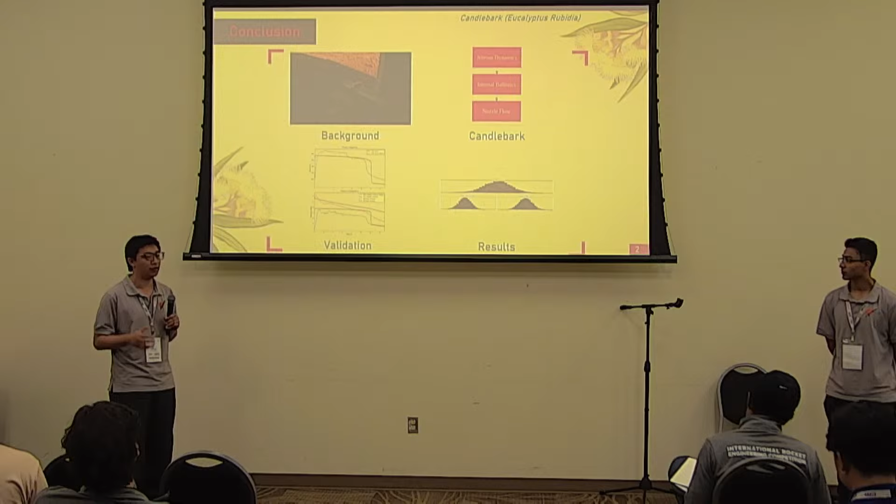Finally, we demonstrated that our simulation has a high degree of fidelity across all engine performance configurations, regardless of whether it is UC Rocketry team's own or external validation. And finally, we demonstrated how it can be used as an extremely powerful tool in the design cycle of hybrid rocket engines, and how it gave the team a significant advantage going into IREC 2025.

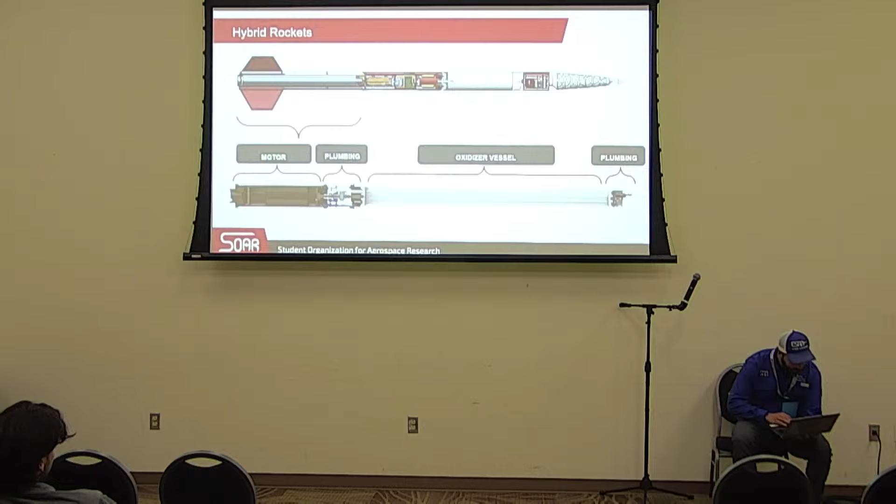Testing. Is this good now? Okay.

So I can start, we can go to this slide. Okay, so hybrid rocket propulsion introduces a more complex system than traditional solid rockets. There are active fill sequences, multiple stages of operation, involving many points of control and necessity for real-time feedback. Operators aren't just lighting a motor, they have to interact with the rocket throughout its life cycle. These systems demand extensive software control and allow for more active decision making throughout the launch process. While we try to mitigate much risk through operation procedures, there are increased risks with electronic control that we have to mitigate.

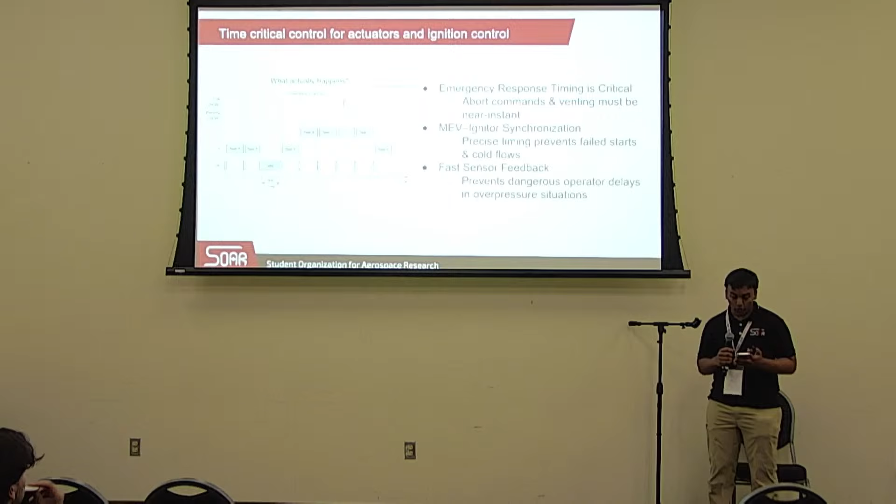Now, why is precise control timing essential for safe operation? In hybrid rockets, timing isn't just about performance, it's about safety. If an anomaly like overpressurization occurs, the system must react immediately. That means commanding vent valves or actuators like our main engine valve or fill or vent valves within milliseconds. Any delay in aborting could cause catastrophic failure, especially during fill when tanks are pressurizing or range operators are working with the system. Critical sensor latency matters too. For example, if software is reading old pressure data, the fill operator could be making decisions based on outdated values, potentially leading to wrong decisions and dangerous outcomes. Along with latency, the system must also ensure that data communicated over wired and wireless links are not corrupted, which may also misinform the operator. Reliable real-time critical actuation isn't just nice to have, it's a foundation for safe operation.

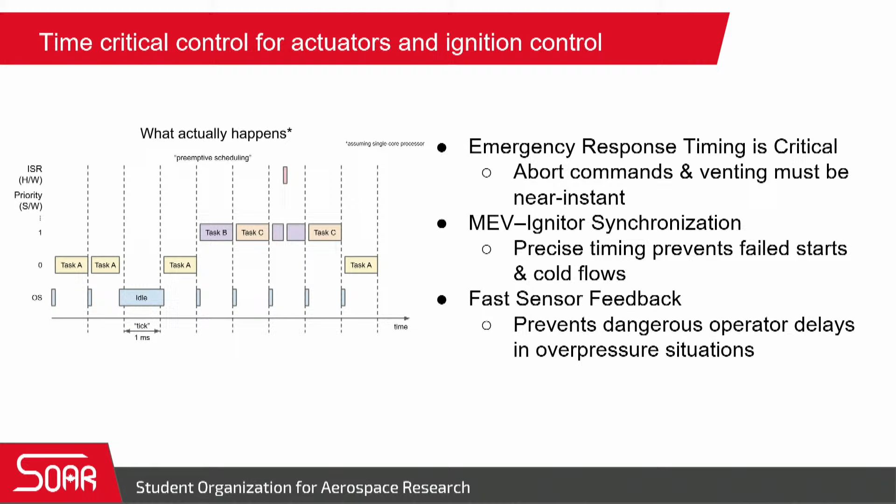One of the biggest risks in any launch operation is operator error, especially when dealing with high-pressure fluids and ignition systems. For example, the main engine valve cannot be opened arbitrarily during the fill process, leading to uncontrolled flow. Additionally, some processes must occur in a specific sequence, such as the main engine valve must open after igniters have been lit. Finally, if communicated data is corrupted, then we must be able to account for this and avoid showing the operator this data.

In hybrid rocketry, increasing the number of sensors may seem like a simple design choice, but it significantly impacts both system complexity and operational safety. First, there's notably an increased system overhead.

More sensors demand higher data throughput and consume resources. The system must acquire, filter, and respond to sensor inputs in real time, which introduces challenges in scheduling critical commands that can switch between handling and collecting sensor data and being able to stop this process and switch to more critical commands.

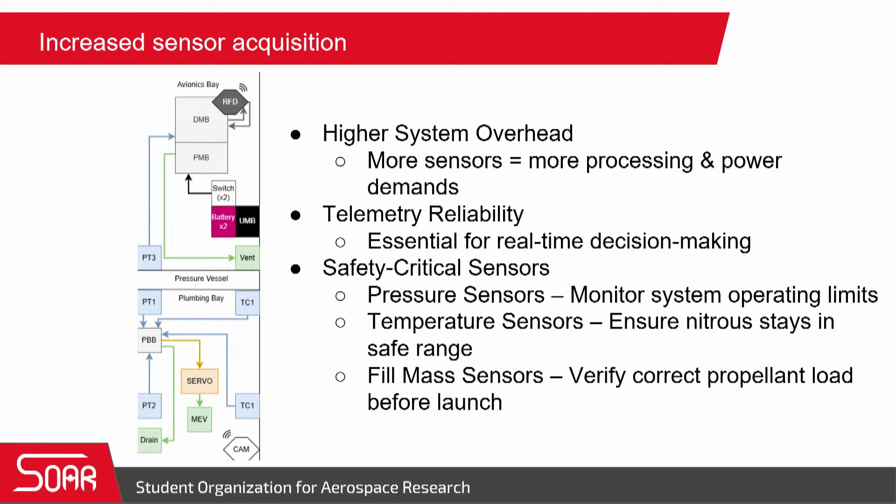Now that we've addressed operational issues, there's also software and electronic systems issues that we must address.

We must consider the failure of our own systems and put mitigations in place to avoid harming people and the systems themselves. Without clear, timely communication from the rocket, the ground operator is essentially flying blind. Losing telemetry mid-fill or with a pressurized rocket or just before it launches can create uncertainty and put hardware and people at risk. Intermittent power issues may automatically turn valves to their default state and potentially injure operators during fill or cause unpredictable behavior during rocket flight.

Unhandled bugs and memory issues can freeze or crash the system. In embedded systems without proper fault isolation or watchdogs, this can stop all control, leaving valves stuck open or closed. These systemic risks inform every part of our software design choices, from preemptive scheduling to watchdog timers. The next slides will show how we mitigated each of these with deliberate architectural decisions.

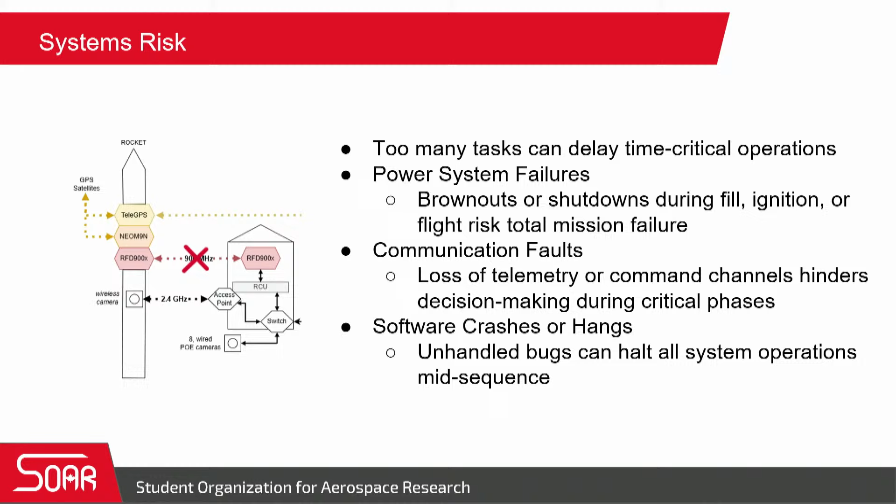Our system had to be designed to handle sensor data collection, storage, communication, and react to real-time commands like valve actuations. These conflicting demands necessitate a reliable and deterministic operating system architecture where tasks are scheduled based on priority and timing requirements, enforced rather than handled by brute force or manual logic. A real-time operating system, for context, is designed to perform operations in a precise amount of time, respecting well-defined deadlines.

To meet these needs, we built our own operating system around FreeRTOS, an open-source real-time operating system kernel. The kernel facilitates interactions between hardware and software for the computing system. More importantly for us, the kernel facilitates concurrent execution of multiple tasks, including sensor data collection, actuator control, debugging, and communication.

Now we needed to use this as a base and create a system that would give us deterministic behavior on startup, while running, and when each thread is communicating with each other. Leveraging C++ polymorphism, we were able to create base classes and define generic structures for the behavior of each of our tasks or threads. Each task is a singleton, ensuring that only one instance runs at a time, which improves predictability.

and prevents duplication of critical operations. Tasks extend from the base to serve specific roles while maintaining core behaviors like safe initialization and standardized execution, and a shared communication protocol. This generic structure ensures that our system behavior is deterministic.

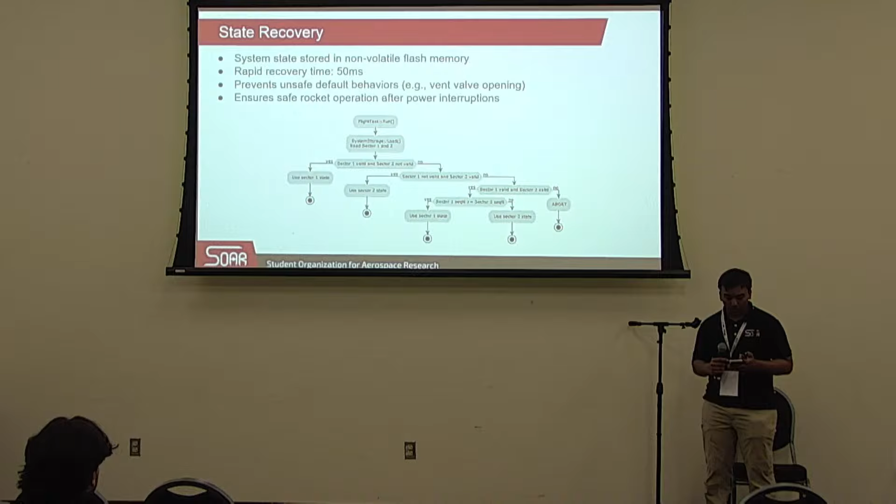We tested this feature thoroughly and achieved a fast recovery time of 50 milliseconds. That speed is critical. It means the rocket can quickly regain its correct state without missing transitions or triggering invalid operations. Overall, state recovery provides a vital layer of resilience, allowing the system to handle unexpected power failures safely.

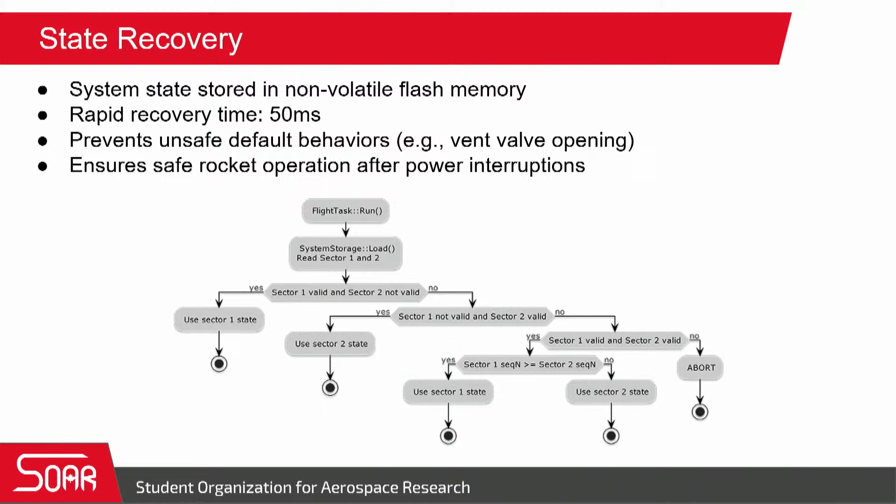To operate a hybrid rocket remotely, we need a communication system that is both lightweight and resilient to faults. This includes handling corrupted data, confirming command execution, and ensuring that all systems speak the same language.

On our rocket, we use C++ with serial data communication, and in different parts of our ground systems, we use Python to handle the data. It can be really easy to write different code and define data formats separately, which could mean you don't handle your messages correctly.

Hence, we chose to use protocol buffers. Protocol buffers let us define our data structures once and generate parsing code in C++, Python, and any other languages. So essentially, we use a proto-language, we define our message formats, and then we just generate the message payloads for every language we possibly use.

This guarantees that every node on the rocket or ground interprets telemetry and commands consistently and safely. No manual parsing is needed or ambiguity.

To define clear message boundaries, we encode every message using COBS, which is consistent overhead byte stuffing. This removes any zero bytes in the data payload and makes it easy to detect the start and end of every message. Every zero byte there delineates between data packets.

Every message includes a 2-byte CRC, which is a cyclic redundancy check. This ensures the data integrity of the message. If any bit in the message is flipped, we can use the CRC and confirm that the data is corrupted, and ensure that we catch this error before displaying it to the operator in the GUI.

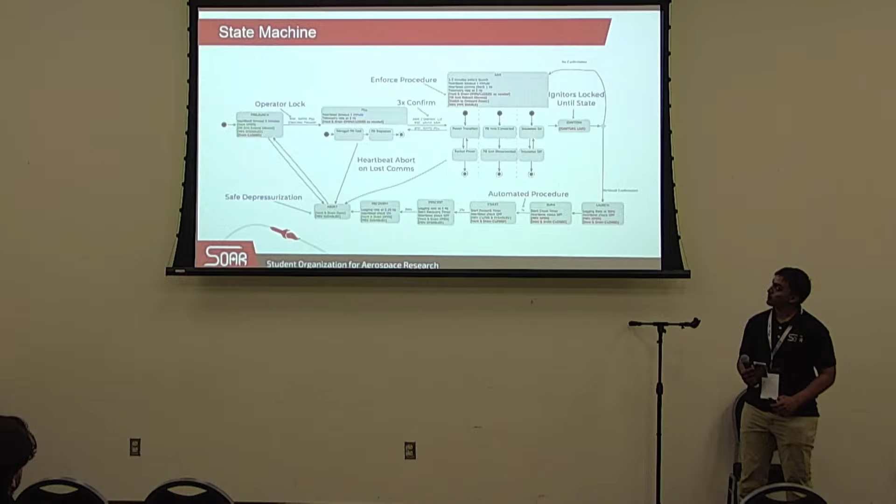If you guys have any questions. Yeah, so you talked about FreeRTOS implementation on your system. Could you go a little bit more into that, like what kind of scheduling algorithm you used there, if it was like deadline monotonic or rate monotonic, or that sort of stuff?

So we are just using the default baseline scheduling algorithm, and we are relying on setting up FreeRTOS with the priority of our tasks, and then we're just relying on the base kernel scheduling of the tasks to preempt. For more specific context, for more critical actuators, we prioritize those higher. And even when it comes to sensors, we have other onboard sensors like IMUs, which are lower priority since they aren't critical to operation. So we also have our sensors scheduled differently, so we always rely on having the most important thing to execute.

Okay, cool. And then, kind of off of that, how do you handle resource management, like if you have a critical resource that one of your sensors needs to acquire, what kind of deconfliction are you doing there?

We're just using mutexes.

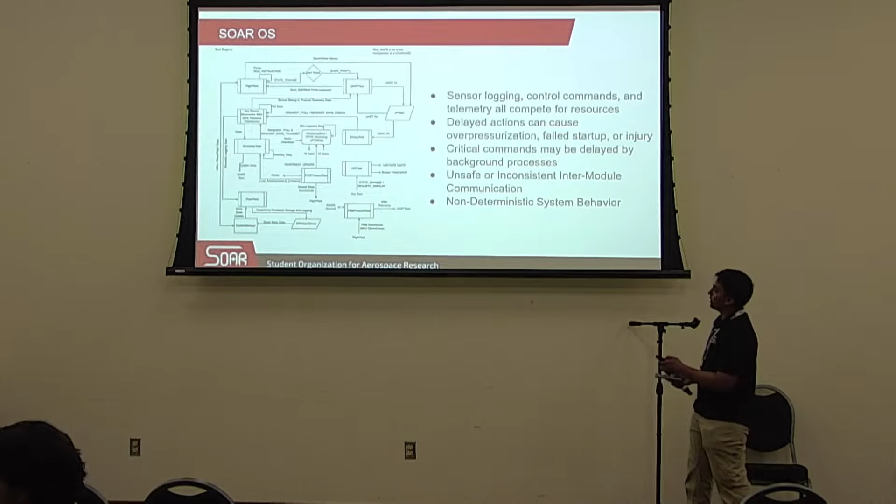Anything else? Do you have any file system for storing your last system state? And if so, how do you prevent data corruption if you have any power loss while you're trying to write?

So for the state recovery you mentioned, we separate our flash chip into two sectors, and then we redundantly write it in two sectors. As you can see from the diagram here, if we fail to read from one sector, we'll read from the other one. We are making the assumption that we have written the state because when the operator changes state at any point, we write it whether there's a failure or not, so we don't wait for a failure to write it. The system state is written, like the last system state, whenever change is already written. So if there were to be a race condition where as soon as the operator pressed like the next state and there was a power shut off, then that's not in our control. It would just recover to the last known state.

Did you do any sort of system level analysis with before and after? Like here's our risk, you listed them out at the beginning, but here's our risk, here's the consequence, and then after analysis, here's the mitigated risk and the mitigated consequence. Did you do any of that?

No, in all honesty, for this one, we kind of had a layout of our requirements and risks, and we didn't really have a system in place before to compare it to. So this is just kind of what we started with, and we've just been going off of that. But you had requirements that you had. Yes, yes.